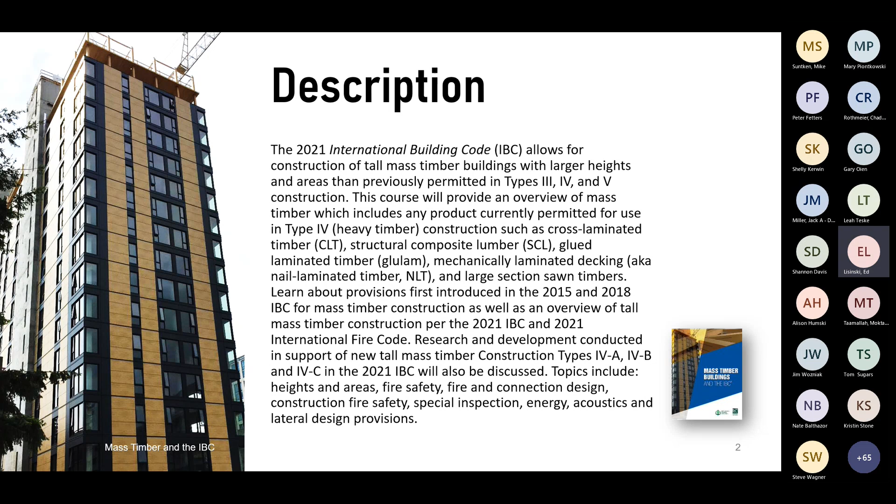I hear a lot from people saying we're not Milwaukee, we're not Madison, we're not going to get 18-story skyscrapers made out of wood, and I agree with that. We'll actually see some pictures with some of this mass timber. There are hotel developers, apartment developers, looking at using mass timber for even 3-story, 4-story buildings. There's even some little utility structures starting to use mass timber too. So yes, you might not get the big huge ones, but you're probably going to get mass timber at some point. There are so many benefits that you'll probably see quite a bit of that pop up in all communities.

The learning objectives are kind of the same thing as the summary, so I won't go through that. As for the outline, don't worry about the breaks that are on there - we're going to do breaks as we go.

All right, real quick though, what's everybody's job function here? How many plan reviewers do I have? A handful. Inspectors, most of them. Building officials and directors of departments, things like that, yeah. Fire officials, just one in the back there, all right. Any architects, engineers, contractors? Okay, a couple of those as well, awesome. How many are state employees in the room at least? All right, so about half, so, all right, good.

All right, so mass timber. Why do we need mass timber? I get asked that a lot - what's the big deal with this stuff? So here's a time-lapse video.

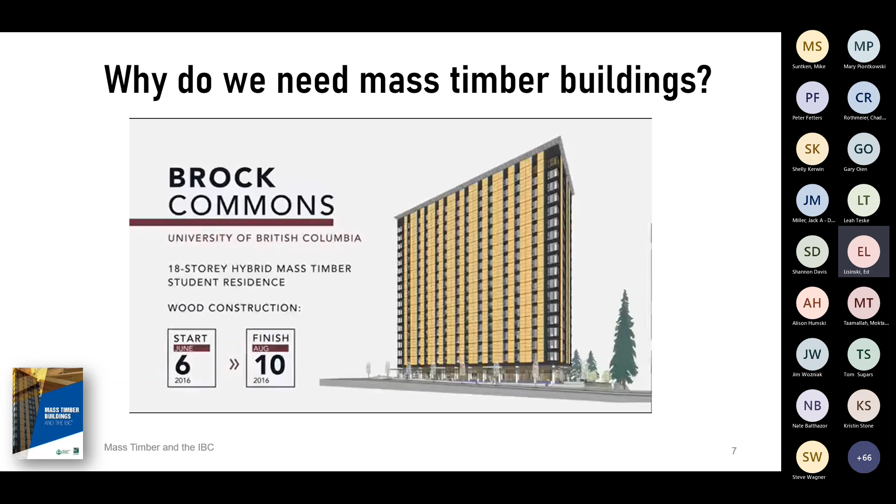This is a project up in Canada, in British Columbia, Brock Commons. I don't know if you caught the dates on there, but it's an 18-story project. In the lower right-hand corner, there were nine carpenters on this whole project - that's all they had putting this whole thing together. They're doing about 4.5 stories a week, getting an 18-story building done in 13 weeks.

Using mass timber here, they're using basically glulam for beams and columns, and they're using CLT - cross laminated timber - for the floors. We'll get into that quite a bit in this project. You can see the glulam columns going up in about 5 to 10 minutes - they're installing that column and moving on to the next one.

Is there anybody here from Milwaukee that was involved with the Ascent building at all? All right, just John. This is real similar to how the Ascent Tower was put together in Milwaukee as well. You see week 7, the facade's going up as they go, so they can kind of keep up with that and keep this building enclosed. That whole building was enclosed in about 15 weeks, I think.

You can see that they do have non-combustible stair towers - concrete stair towers in there. Anytime you get up over 12 stories, they have non-combustible stair towers. So there you go - 13.5 weeks for an 18-story building, all the way up and fully enclosed.

There's some of the environmental stuff - I know you guys can't read that, but you hear this all the time: you're cutting down all these trees to make these buildings, what's going to happen to the forests? In those hard to read stats, it took 6 minutes to regrow all the wood for that entire building in North America. So pretty much in the time it took to talk through this, we grew all that wood to make that 18-story building. So you're not going to be losing wood - we're always going to have that, we're always going to keep these sustainable forests going.

When we talk about codes, always make sure you're using the right reference standards. So for 2021 IBC, you're using the 2018 NDS. For the 2015 code, you're using the 2015 NDS. Hopefully everybody's at least somewhat familiar with the NDS and the NDS supplement. The NDS gives you all the formulas and equations on how to design wood buildings. The supplement gives you the characteristics of the wood, the wood strength properties, and section properties of the members. That's how those two documents work together. They're different, but they work together quite a bit.

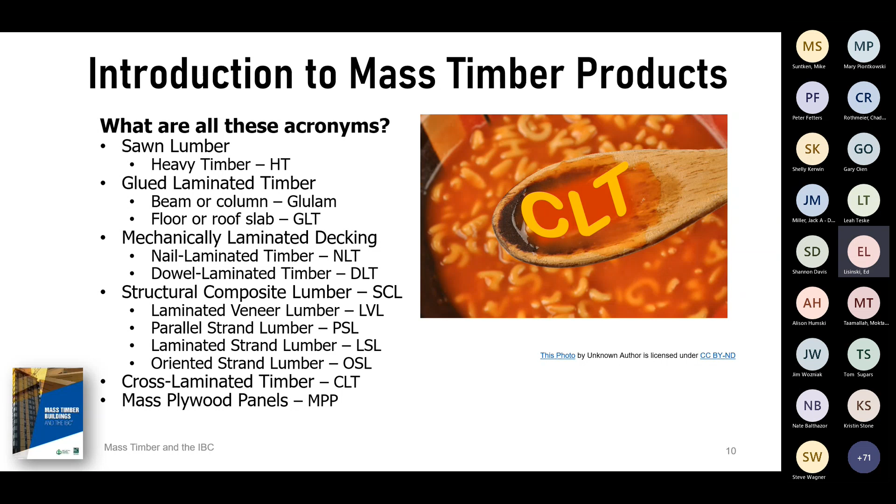So when we talk about mass timber, what are we actually talking about? This slide walks you through all the different things that are considered mass timber. If it's not on this list, it's not a mass timber element. We'll go through each of those in a little bit.

At least personally, when I started hearing about tall wood buildings, I was thinking about traditional stick frame buildings and how are you doing 18 stories with this stuff. Just so you know, mass timber has nothing to do with light frame, conventional light frame construction. This is completely different. Yes, they're both made out of wood, but that's where the similarities stop.

You can't use repetitive members. You can't use wood studs, wood floor joists, wood trusses, anything like that in a mass timber building. You're not going to see any of that stuff. That's why you're able to go so much bigger and taller with this stuff.

You think about mass timber, what do you think about making a campfire? You got a flame down there, but if you just throw a bunch of really big logs on there, the logs are going to burn while that flame's there, but as soon as that flame goes out, the fire on those big logs is going to go out pretty quick. It's going to char, it's going to protect the inner workings of that log, and you're still going to have a big log in the morning.

But you put a whole bunch of sticks underneath there, like wood studs or trusses, smaller members underneath there, now you're going to have a much bigger fire, and that fire is going to be on that log a lot longer, and yeah, it can burn out that log. So that's why in mass timber buildings like this, you're not going to see any of this traditional stick frame construction at all. The interior walls are going to be concrete masonry, steel studs and drywall, that type of stuff, but we'll get into that as we go.

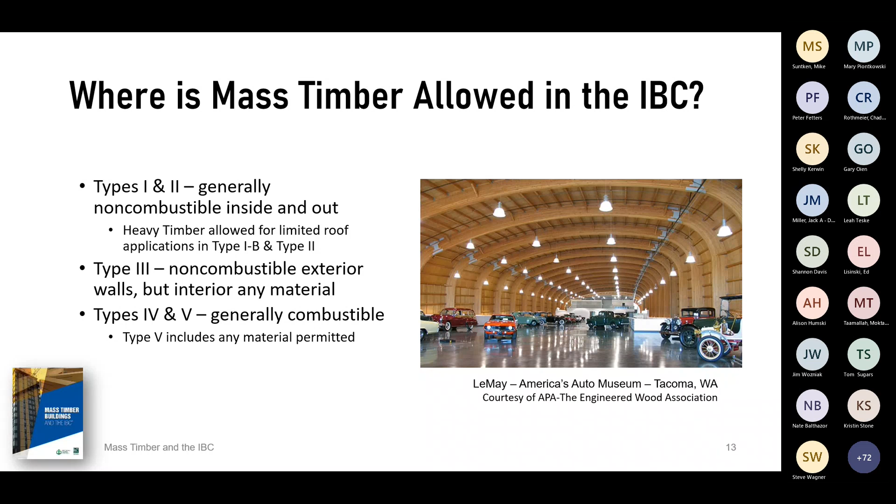Where's mass timber allowed? Type 1, type 2 construction, obviously it's non-combustible, but in type 1B and in type 2, you can use mass timber elements in roofs in certain circumstances. So heavy timber is allowed in some roof applications in 1B and type 2. In type 3, you've got your non-combustible exterior, but anything interior, you can use mass timber on that. And then types 4 and 5 construction, you can use mass timber throughout anywhere there.

Again, mass timber elements are the only combustible elements that you can use structurally in tall mass timber buildings. You still can use other combustible materials for non-structural purposes. So yeah, you can still have wood finished floors, wood doors, wood windows, chair rail, things like that, which you could also use in type 1, type 2 construction. But structural elements are always going to have mass timber elements.

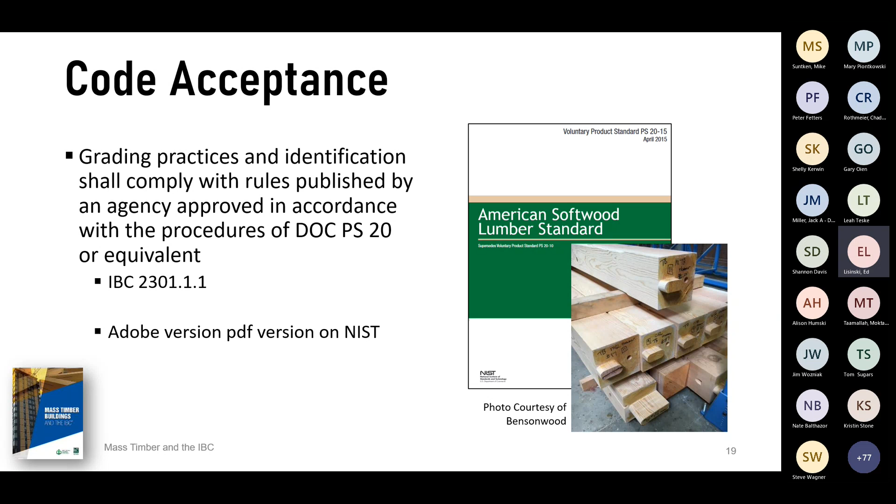The old traditional type 4 construction, you're going to use the PS20, that's the standard from American Softwood Lumber Standard. That's the same grading and same rules for that as you would any other piece of wood that's out there. That's covered in the NDS under Chapter 4, and in the NDS supplement, also in Chapter 4, that's where you get your reference values out of it.

I'll skip through some of that just because, again, you guys have seen this stuff before. So glue lams, again, products you guys have seen many, many times, but let me jump back a little bit here.

All right, so how are glue lams put together? Basically, you have a whole bunch of 2x or 2x type structures glued together, pressed together, and they make a nice big beam out of it.

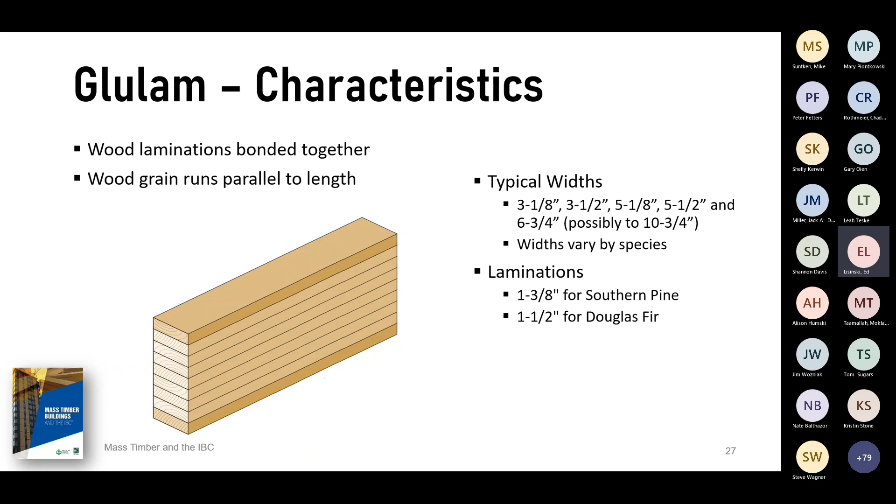Again, the wood laminations are bonded together, they're all running in the same direction. Glue lams, the adhesives that they use in there, they're all fire rated and they're exterior rated, so you can use these exposed in fire. The adhesives are good for that. We'll talk later on about how you have to kind of oversize them to work with that char, but we'll get into that later on.

You can also take glue lam, lay it on its side, use it as a floor panel, and that's considered a GLT, or called a GLT.

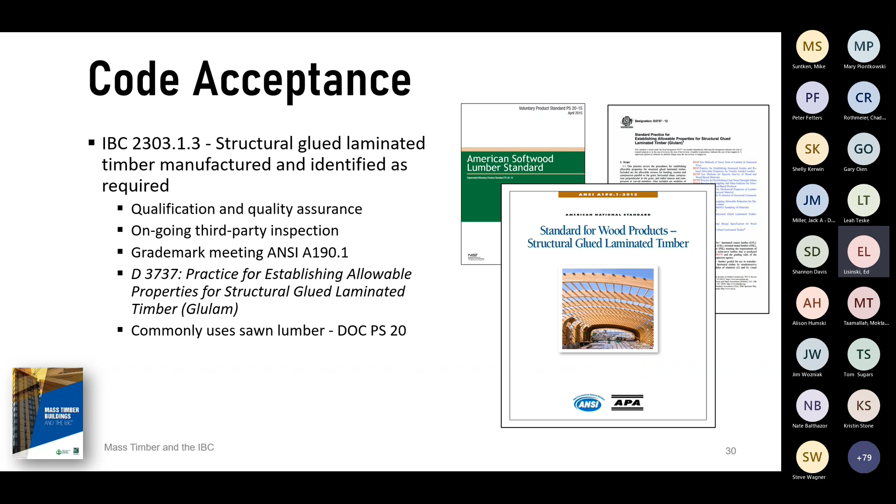There's some documents up there of the code acceptance, again. So you got the PS20 pops up again just because you're using typically sawn lumber in there. But then also the D3737, that's basically your standard for using glue lams. That's going to regulate the adhesive that's in there and things like that.

There's grade marks on them. It's going to give you a whole bunch of information. If you're out there in the field, make sure that you're checking the glue lams that they're sending out match the plans for what the structural engineer designed for.

Chapter 5 of the NDS covers glue lams. They're also in the NDS supplement.

They're going to be finger jointed typically, just because you're getting some really long lengths, right? So they're going to have to finger joint a lot of that lumber. So if you do see finger jointing in glue lams, that's perfectly normal. Actually, typically a lot of times you can, when you do finger joint lumber, you can actually make it a little bit stronger because you can take out some of the knots and bigger imperfections and kind of cut some of those pieces out, glue it back together, and you're good to go.

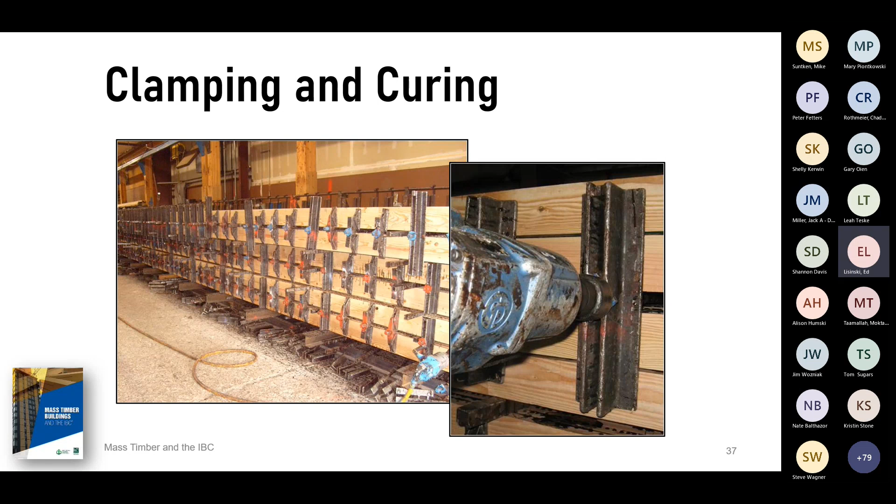So when they're making those bigger columns and beams, this is kind of what that looks like in the shop. So they stack this stuff all up together. They have a face bonding layer, clamp it down, pressurize it, sand it down, plane it down, get it out to the job site.

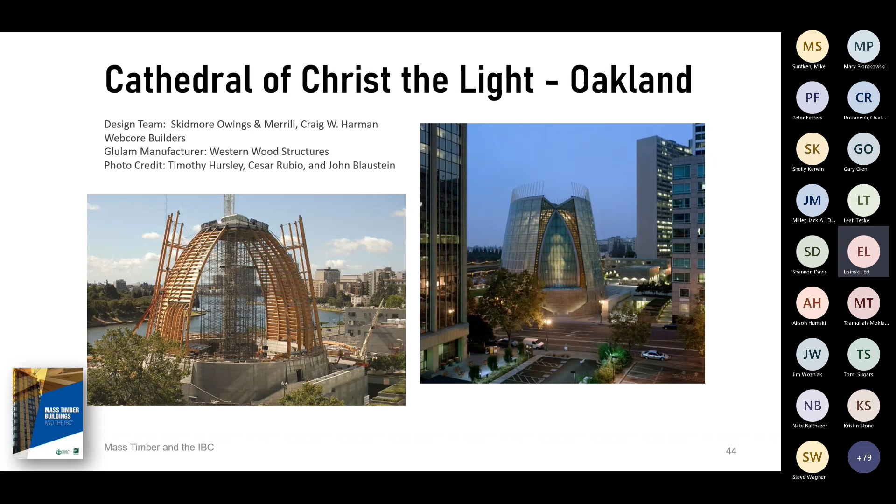Cathedral of Christ the Light in Oakland. Again, you guys have seen this stuff before, but you can do really cool things with it.

Other types of products: nail laminated timber, using that for floor slabs. You can do it in the factory or out in the field. It's basically laying down a whole bunch of 2-bys next to each other, 2x8s or so, and nailing them off one to the next.

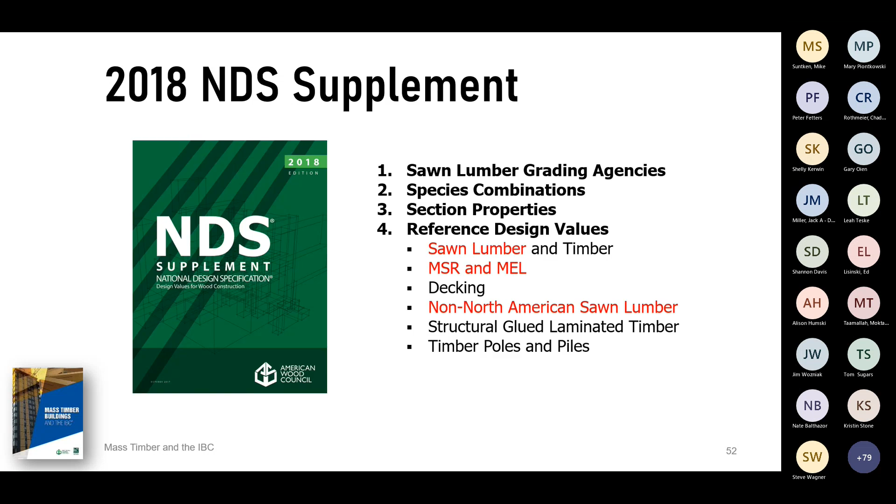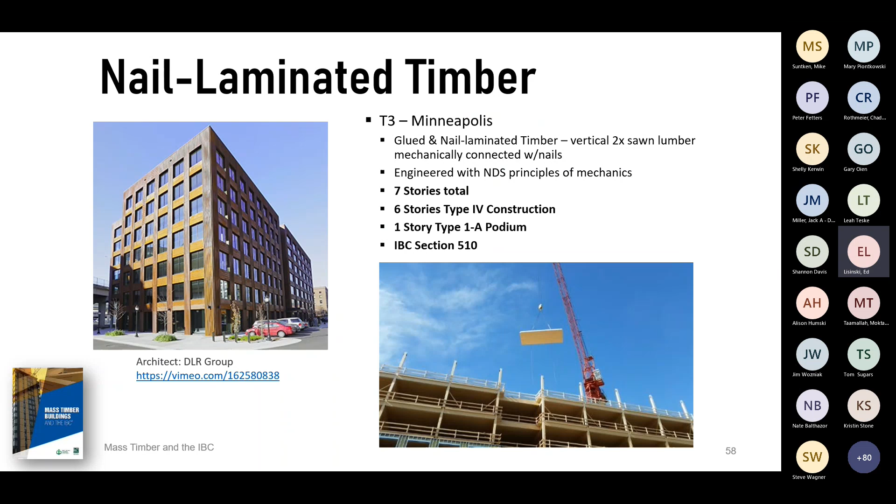There's a nail laminated timber handbook - not referenced in the code, but it's a guide produced by Think Wood that walks you through how to put this stuff together.

Kind of the cousin of nail laminated timber is dowel laminated timber. Very similar - you're putting a whole bunch of 2-bys next to each other, but this time you're boring a hole through it, pounding it and gluing in a dowel. Because of that, you're connecting these together more, gluing them, making a bit more of a bond. So these can actually have some lateral resistance properties - you don't have to add that plywood on top if you need these to be a diaphragm.

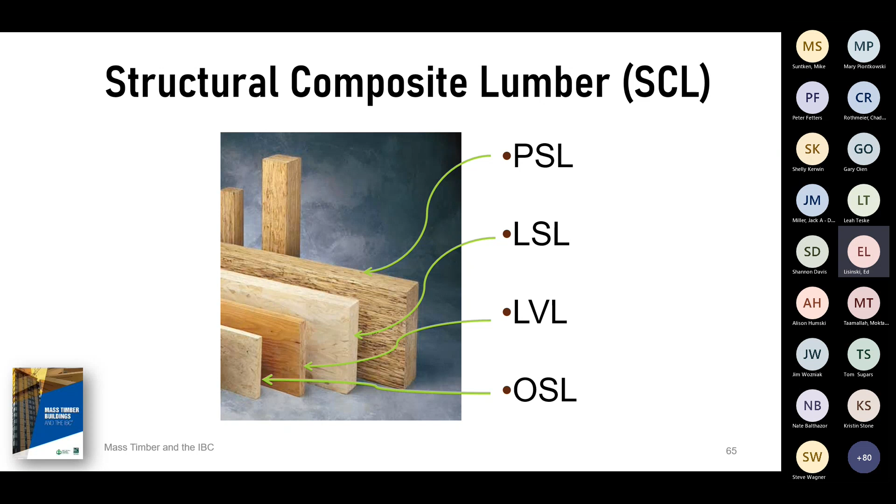There you're taking veneers, gluing those together, all the veneers going in the same direction again, very similar to putting together glue lam, but instead of 2x, you're using veneers on that instead.

Structural composite lumber is in chapter 8 of the NDS. Each of the manufacturers will usually produce their own strength properties on that. Otherwise, APA, the American Plywood Association, produces generic strength properties as well. So either check APA publications or the manufacturer specifications for that stuff.

But the one thing to remember, that table 602.4 in the 2015, or 2304.11 in the 2018 or 2021, you have to meet those minimum size requirements. So you're not going to see those small little LVLs that you'll get over a garage door—I think it's 3.5 inches minimum on beams for width. So again, make sure you're checking that the sizes are appropriate.

All right, and then the big one here, cross-laminated timber. This is kind of what allowed us to go bigger and taller with our wood. It's the substitute for concrete and steel on floors.

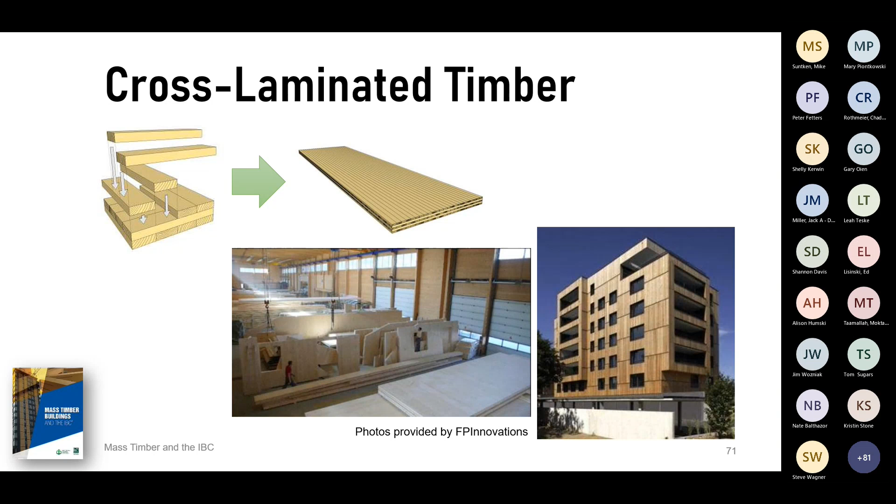The PRG 320 is the standard for those. There was a big change in 2018. We'll talk about some of the testing that was done using these in a little bit, but the adhesives used in the older stuff, that's what was tested, and that's what was used when they wrote the 2021 code.

The PRG 320-18, the new version that came out in 2018, greatly increased the capacity of the adhesives that are used. So now they're doing a whole bunch more testing. And that's why in the 2024 code and beyond, you can almost see these buildings going bigger and being exposed to fire a little bit more.

So again, the adhesives used are real similar to glue lams—they're going to be fire resistant and exterior grade. After all the testing was done to get into the 2021 code, they really improved those adhesives again, and that's why in the future you're going to start to see even more expanded use of this stuff in the codes.

Cross-laminated timber does have its own section in the NDS. And here's a brief little history of CLT.

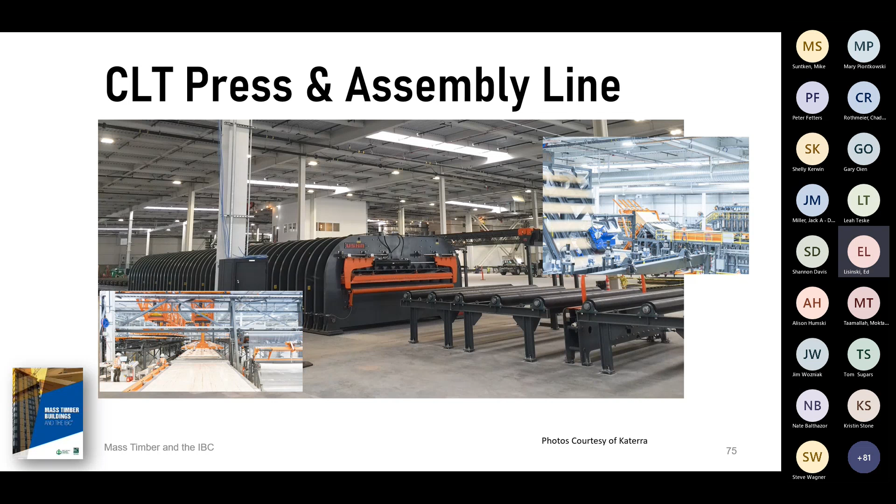All right, so here is the plant, here's how this stuff is getting made. It's real similar to glulam - basically putting those all in there, gluing them together, putting them through a press. Here's a few more pictures of it, you can see another glue layer going on the left there, and then you come out with these big panels at the end.

One of the points I was going to make too, about not a lot of people using it here - the Ascent Tower, and Atlanta's getting a 22-story mass timber building pretty soon. I know at least those two for sure, and I think the one in St. Louis is going to be starting as well. All of those are actually getting manufactured out in Austria and then shipped over, all those panels.

So even with the logistics of shipping and transportation, these buildings are still ending up cheaper - they're ending up with labor savings and faster construction time frames. You're still seeing those returns on investment for those costs. But as more plants start building this stuff in the US, that's going to make it even easier.

These panels right now, really the only controlling factor on the size is the width, which is based off the press—you can't go any wider than the press you have. But the length you can really make as long as you want. It's a matter of transporting them to the job site then. How are you getting them?

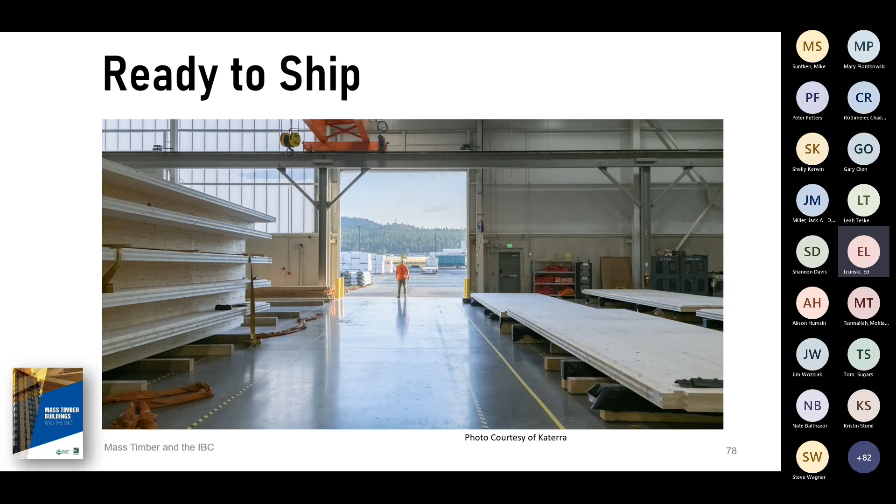So you're making these big, long panels. Most of the time they're getting used for floors, but you can use them for walls. This presentation is gonna go into a lot of scenarios if you're using them for walls. People do use them for walls, but not as much. You're mostly seeing them as floors, but we'll go through a whole bunch of wall scenarios as well.

I think he had 8 batteries lined up on the wall. So that one runs out, pops that battery out, puts it in, grabs another battery and keeps going.

And that's a whole nother thing on lithium ion batteries, but I won't get into that stuff. If you haven't started looking into that, definitely as building officials, fire officials especially, start looking into lithium ion battery storage. But I won't get into that soapbox because that would be quite a while.

But panel connectors—every time you see Simpson, they've got new stuff coming out with this because, like Randy said earlier, this is new stuff. As people start to use this and work with it in the field, they're coming up with new connectors, new fasteners—how can we make this process even easier, even better? So every time, they're coming up with new panel connectors and things like that. These little clips that they have...

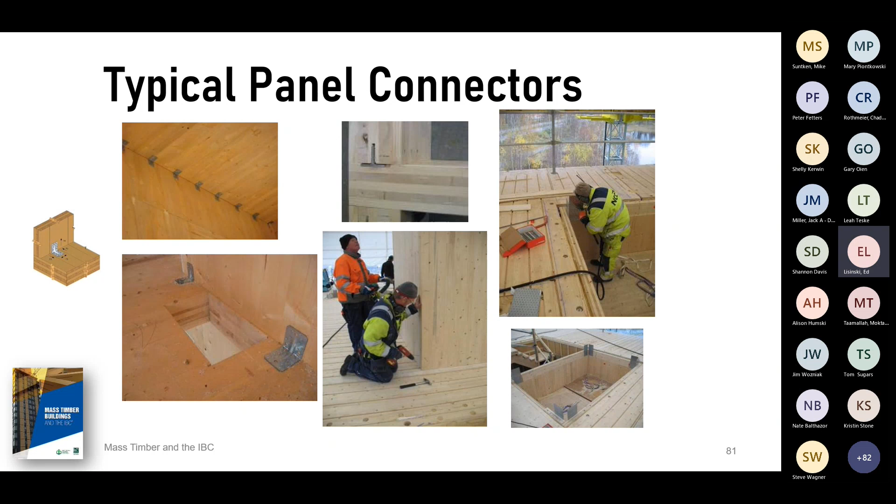But again, they were building up everything on the inside as they went. Because that was an Army hotel, they actually had to go through U.S. Department of Defense blast loading requirements to withstand bombs and things like that. It passed all that stuff.

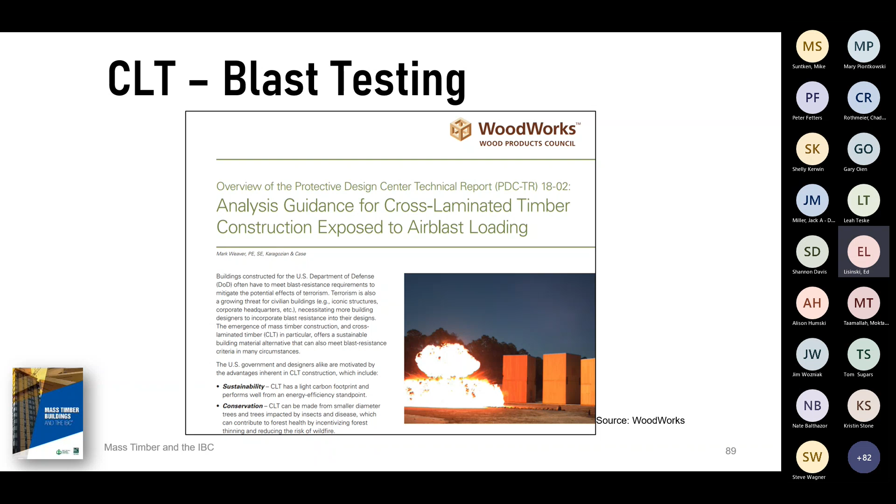A lot of universities are using this. Clemson, Michigan State have huge programs using this stuff. Pretty much every California school, every Oregon school - just because they can bring in their construction, engineering, and environmental schools and really study the environmental benefits of CLT.

They're sequestering so much carbon inside these buildings - I forget how much, this one might have it on there. On some of these it talks about how many cars, you're taking hundreds of cars off the road each year by building one of these buildings, just with all the carbon you're sequestering inside the wood.

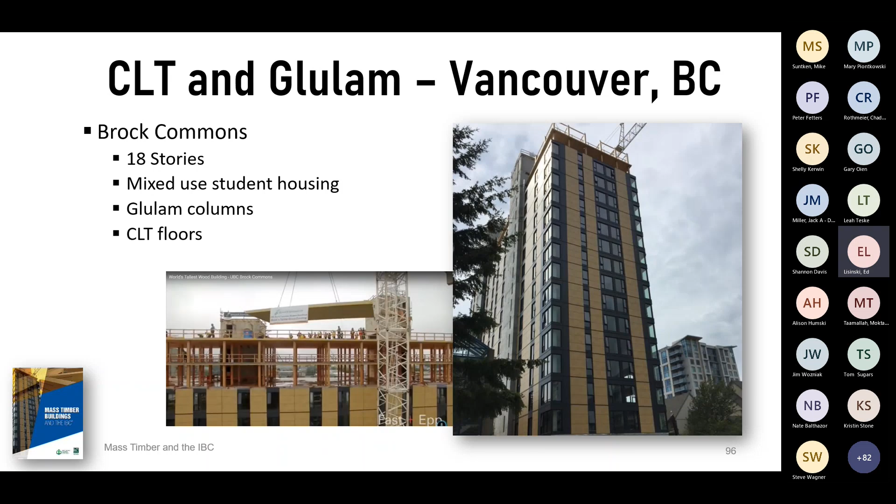Again, a couple other projects up in Canada and things like that. Mass timber throughout the world is really starting to take off quite a bit.

They'll actually make smaller panels of plywood about an inch and a half thick, and then move those down into other plywood panels - so they basically make plywood and build it up with additional plywood. Mass plywood panels aren't covered in the AWC at this time, so that's something you'll look for in your ES reports. But as people start to use this stuff, it's probably going to start getting into the code pretty soon.

Questions on any of that stuff? Are there standard methods of connections for panels, or is it all tested or engineered? It's mostly all engineered, and we'll talk about CLT a lot more as we go. Basically, talking to Simpson or any of those manufacturers if you want pre-done connectors like that. But again, a lot of those are more for seismic applications.

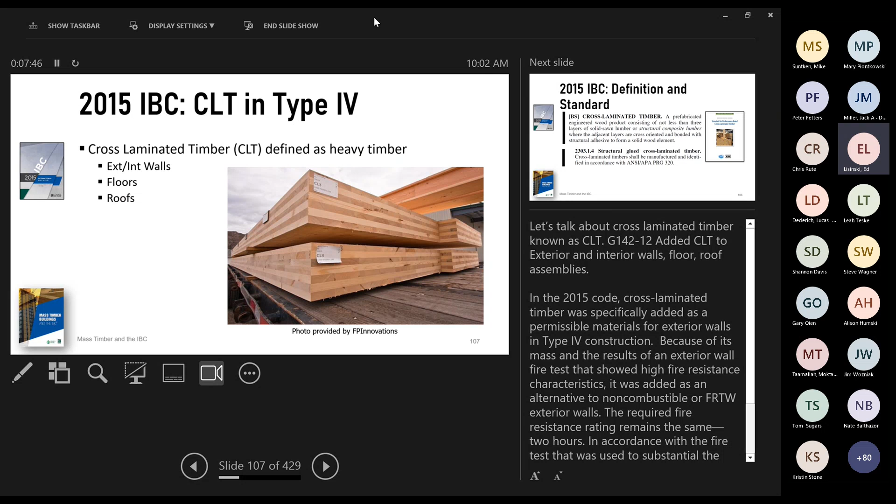Cross-laminated timber was actually introduced in the 2015 code. It was defined and basically spelled out where you can use it in type 4, your traditional type 4 buildings. So cross-laminated timber, the definition was added in there - again, this is the 2015 code.

In order to get that in there, there were a whole bunch of E119 tests that were done. They determined that with one layer of 5/8 type X drywall on there, you can actually get a 3-hour fire rating out of a CLT panel using the E119 test. You can see it down to 3 hours and 6 minutes - I think they ran that through.

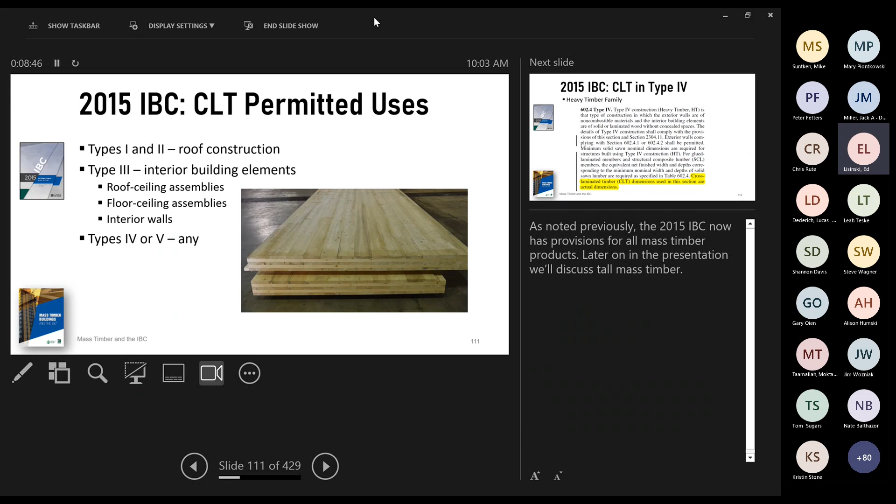And then again, that's where you're starting to develop all those same locations that you can use this stuff in the codes that we talked about earlier. So type 1, type 2 construction, using that on the roof in 1B, and then 2A, 2B, you can use mass timber up there. Type 3, anywhere on the interior, pretty much except for your exterior walls. And then type 4 and 5, you can use that stuff throughout there.

Again, CLT was brought in and basically just inserted into type 4 construction throughout those code sections in 602.4. One thing to note, still in the code - cross-laminated timber dimensions are actual dimensions in the code. So everywhere else you're talking about wood, you're typically talking about nominal widths, nominal sizes, but CLT is actual dimensions.

So cross-laminated timber and exterior walls - again, you can use that stuff in here. I'm gonna kind of skip through a lot of this stuff, I'll let you know what's in there, but I won't go through the actual code language since it's 2015, we're moving on from that, and you guys can all read the code anyway. So again, cross-laminated timber and exterior walls, some provisions were added in there for that.

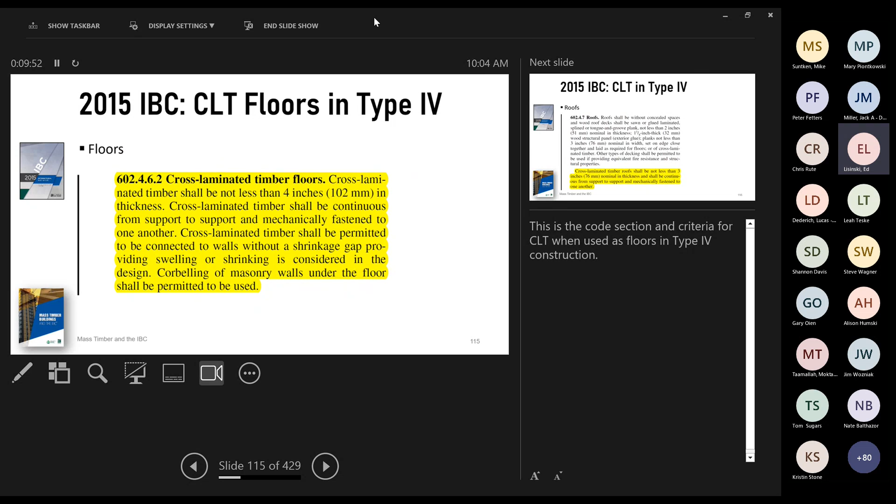Wood structural panels in floors, cross-laminated timber floors, was a section introduced in chapter 602.4, which is type 4 construction. Roofs, cross-laminated timbers were added, minimum 3 inches thick. Partitions and walls, laminated construction 4 inches thick or 1 hour fire resistance rated. Exterior walls, again all in chapter 602.4. And that's pretty much it.

So in the 2015 code, CLT was introduced, and it basically said that in type 4 construction you can use it in floors, in ceilings or roofs, in walls, interior and exterior, and that we're using actual dimensions. So that's the first introduction to it.

In the 2018 code, the IBC really started putting a lot of requirements into chapter 602.4. Type 4 construction was getting huge compared to the other construction chapters, so they pulled everything out of 602.4, all the construction requirements, and moved it into chapter 23, the wood chapter. So all that stuff we just talked about, which was in 602.4 in 2015, got shifted over to 2304.11. Basically the same requirements throughout, just moved to a different section.

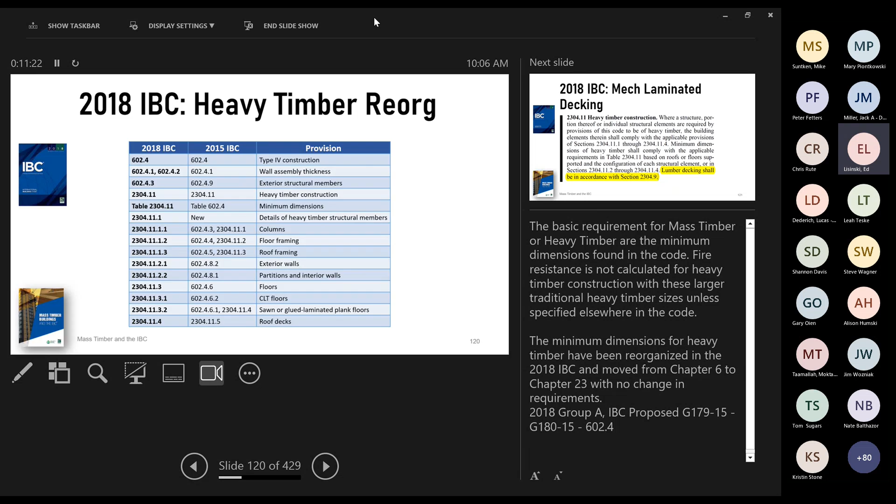Also, some lumber decking, mechanically laminated decking, was added in there. We talked about mechanically laminated floors before, and nailing those off.

Section 2304.9 was added, and that's those nailing patterns I talked about earlier. I'm not going to go through it all since you guys can all read code, but just so you know it's in there, that's where you find it. So if you run into nail laminated decking on a job, this is where all those nailing patterns and requirements came from. It also added a new fastening schedule for that as well.

Cross laminated timbers in exterior walls was changed to 6 inches thick if you're using CLT on exterior walls.

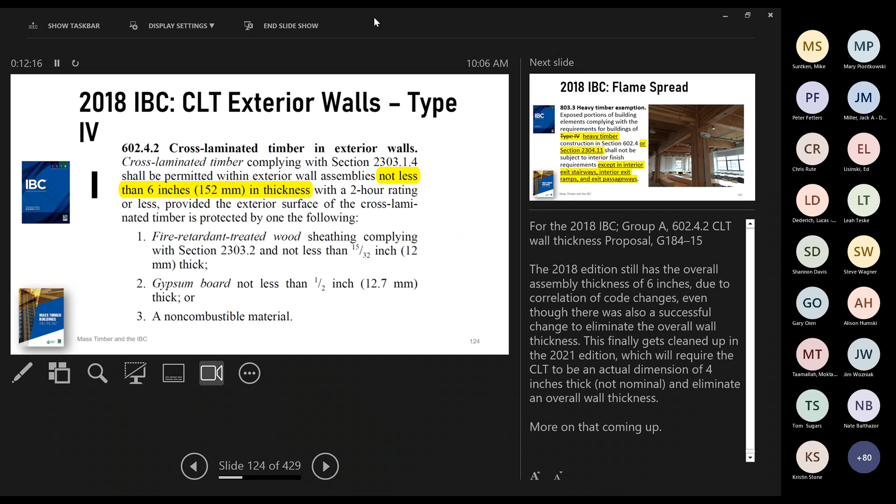Also in 2018, the code committees really started to look at whether we're talking about type 4 construction or heavy timber elements. They went through editing a lot of sections, asking: before it might have said type 4 construction, but are we really talking about type 4 construction or about big pieces of wood? If you use a big piece of wood in a type 5 construction scenario, would this still apply? There's a lot of editing throughout, and I don't have them all listed here, but throughout the code in 2018 they really looked at whether they meant type 4 construction or just big pieces of wood. You'll see that throughout the code.

Here's a bit more on where they were editing that stuff, and then talking about structural composite lumber. A lot of this I'm going to skip through, since we often do these classes with people who haven't gone through construction types and things like that, but I'm sure you guys are pretty familiar with this stuff, so I'm just going to jump through a lot of it.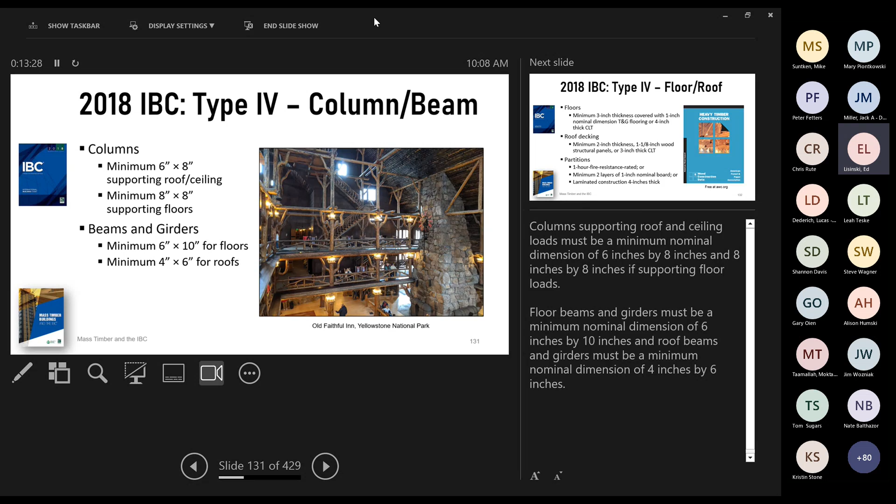But for type 4 construction, if you're using CLT for floors, minimum 3 inches thick, your wood must be covered with 1-inch tongue and groove flooring or 4-inch thick CLT. Roof deck: minimum 2 inches thick with 1 1/8 inch wood structural panels, or 3-inch thick CLT. Partitions: 1 hour fire resistance rated, minimum 2 layers of 1-inch nominal board, or CLT that's 4 inches thick. So those are your requirements for the panels being used in type 4 construction.

Type 3, I'm not going to get into a lot of this stuff. Allowable heights and areas, you guys know this, so I'm going to jump through a lot of that. We get a lot of people who don't know how to calculate area, so we keep this stuff in here in case we need to go through it.

One thing I always want to note for firewalls: they're still any approved non-combustible element except for type 5 construction. That's still in the code in 2021, still in 2024. I don't know of anybody looking to change that in 2027, but even with tall type 4 construction, heavy timber buildings, if you're in a type 4 situation, it's still a non-combustible wall if you need a firewall. That firewall separates one building into two, basically.

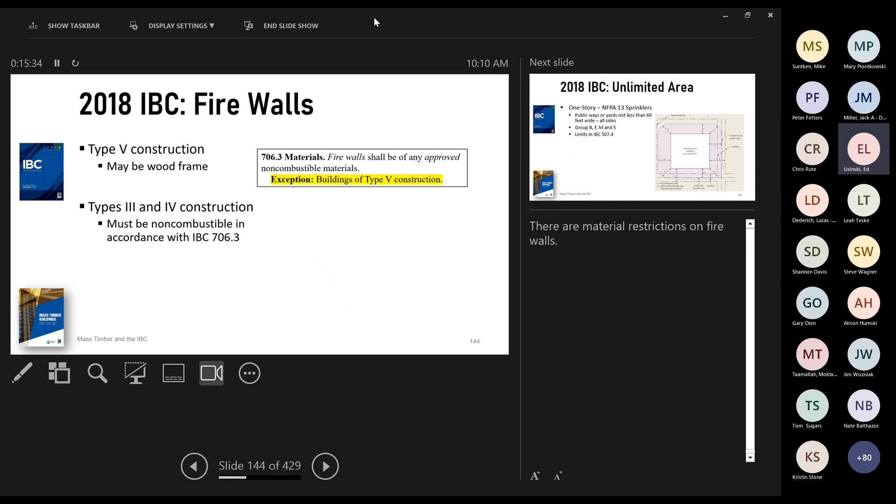Not talking about fire barriers, fire partitions, none of that - you can use combustible construction there. But if you're in a type 4 building, even under the 2021 code, type 4A buildings, it's all CLT everywhere. If you need a firewall, it's got to be non-combustible. You can use CLT in a type 5 building because combustible firewalls are allowed there. So I always want to touch on that.

Again, how to calculate areas and things like that, I'm going to skip through. There were a few things with storage garages in the 2018 code where type 4 construction was permitted.

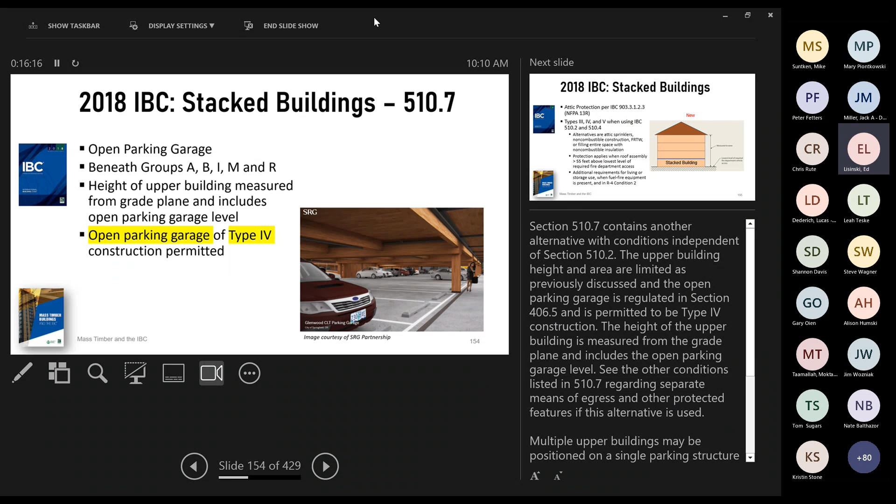Single story S2 parking garage, underneath the group R - your pedestal buildings, you can use type 4 construction down there now. Same thing underneath groups A, B, I, M, and R - pedestal type construction, open parking garages, you can use type 4 construction there.

And that's kind of it. So 2018 was a little bit more just reorganizing, moving everything into the wood chapter, and going through making sure - are we talking about type 4 construction, or big wood type elements? Starting to make sure the codes are coordinated with that. Any questions on 2015, 2018? I kind of jumped through that pretty quick, but alright.

Now we'll get into the 2021 code. I brought this up earlier, but mass timber has nothing to do with conventional light framing. They're both made out of wood - that's about where the similarities stop.

In a similar way, type 4A, 4B, 4C - that's your 3 new construction types in the 2021 code. We'll talk about those quite a bit. Those are totally separate from your traditional type 4 construction, which got renamed as type 4 HT. The heights and areas for your traditional type 4 are still exactly the same - they just got renamed, but there are a little bit of changes with some concealed spaces in 4 HT.

We'll talk about that later, but otherwise 4A, 4B, 4C and your traditional type 4 are pretty much different as well. Same elements, but different in how the chapters are built and how the buildings are put together.

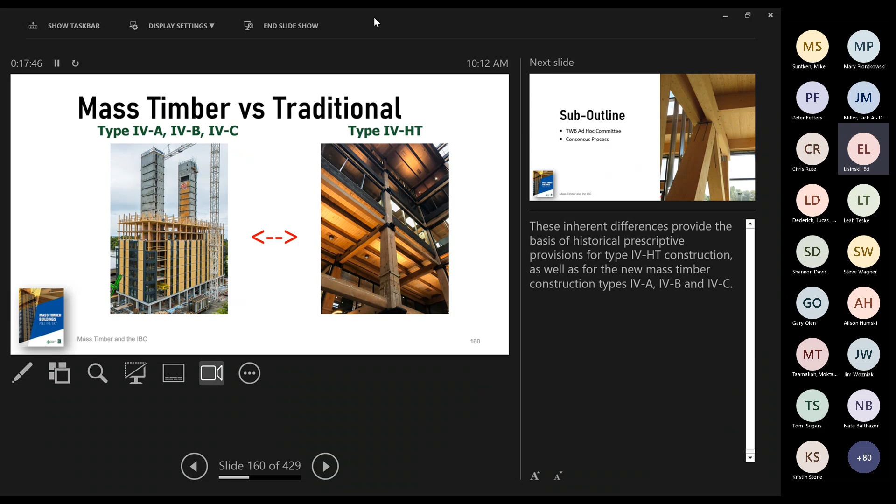So in December 2015, ICC got together and said, hey, people are using CLT, building really tall big wood buildings over in Europe - should we start bringing that over here? So they wanted to put an ad hoc committee together to explore the science and engineering behind these tall buildings, look at the feasibility, and look at what it would actually look like if we put them in the IBC.

So they put together a big ad hoc committee and brought in pretty much everybody - building officials, fire officials, inspectors, plan reviewers, architects, engineers, developers, contractors, some hotel developers and big name hotel chains had representatives in there, fire protection experts, other material industries, and other construction related professionals. They got pretty much everybody into the room.

This is an actual picture of the ad hoc committee at work. I love this picture because if you've seen any of the code hearings, you've got the steel industry, the concrete industry, and the masonry industry all sitting front row at the ad hoc wood committee meetings. So they were all very well involved, and that's why I think this stuff passed - because we got them involved early on. And I say we, but I wasn't part of it - the ad hoc committee in general.

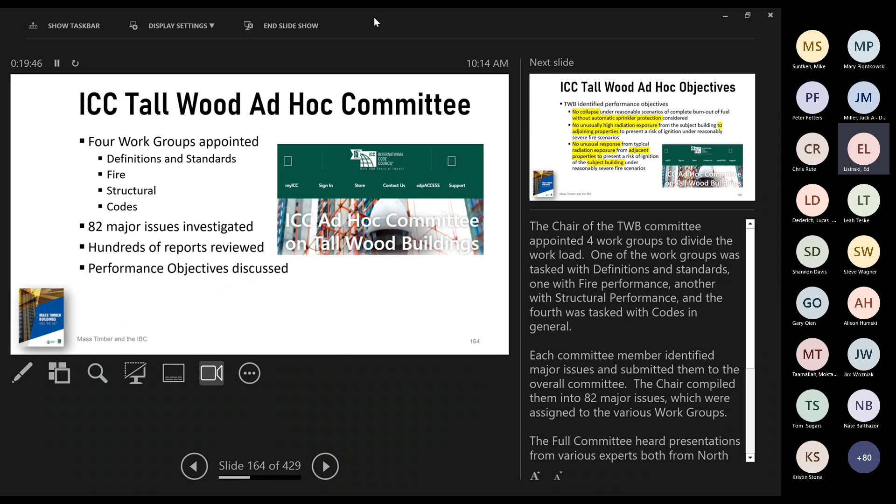How are we going to write this stuff in? So 82 major issues were investigated, hundreds of reports, and they came up with 6 performance objectives and one kind of unwritten one that I'll talk about as well. So they had 6 main performance objectives that they came up with.

The first one: no collapse under reasonable scenarios of complete fuel burnout without automatic sprinkler protection considered. So what that means: you've got a tall mass timber building, and there's a fire, a reasonable fire scenario inside one of those units. Sprinklers don't go off for whatever reason. We want to make sure that building doesn't collapse on itself. Seems pretty reasonable.

The second one: no unusually high radiation exposure from the subject building to adjoining properties to present a risk of ignition under reasonably severe fire scenarios. So now that mass timber building we have, a reasonably severe fire starts in there, we want to make sure it's not going to jump to a neighboring building and start that one on fire.

The opposite for the third objective: no unusual response from typical radiation exposure from adjacent properties to present a risk of ignition to the subject building, again under reasonably severe fire scenarios. Now you've got your mass timber building, the building next door has a reasonably severe fire in it. We want to make sure that fire is not going to jump over and start the mass timber building on fire.

Fourth objective: no unusual fire department access issues. So the fire department should be able to come in and do their job just like any other building that's out there.

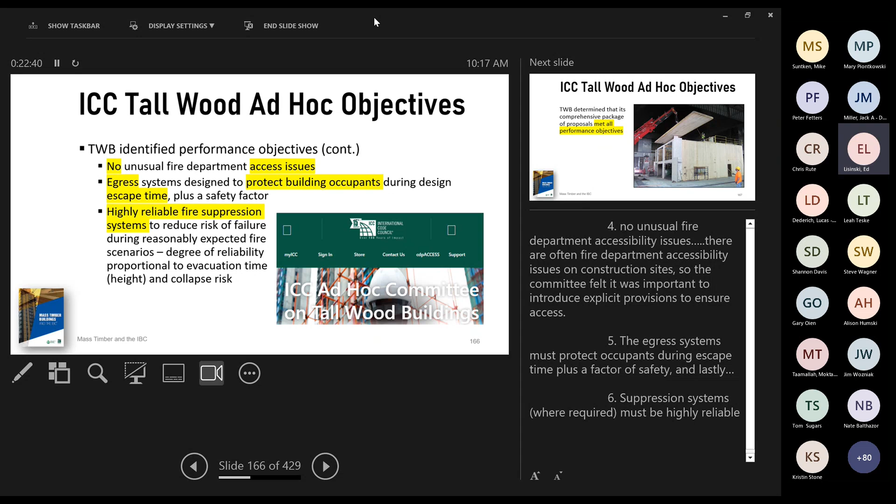That wasn't one of the written objectives, but it was definitely something that was talked about quite a bit in that ad hoc committee. Everything that went into the code had test reports—they had tested it and proved that it works.

At the end, the tall wood building ad hoc committee determined their package of proposals met all the performance objectives, so all 6 of those scenarios that they were comfortable with. This was their test facility. We'll talk about that in just a second here.

So the fire work group—the firefighters, fire protection engineers, and everybody in that group—they wanted to prove everything that went in there, basically. They had a lot of test data from other testing agencies, but they wanted that final test data, that final test report for all the different scenarios they were going into the code with. So they came up with a 2-story condo situation.

It was 30 by 30, had a corridor around the outside, a stair tower on one end. They loaded it up with modern furnishings, and again, they did this as realistically as possible. So they put in the sprinkler system, they cored out holes for plumbing, hooked up plumbing, hooked up electric, hooked up everything. They put in furnishings, and they had a concealed space in there so they could study the effects on that. They wanted to make this as realistic as they possibly could.

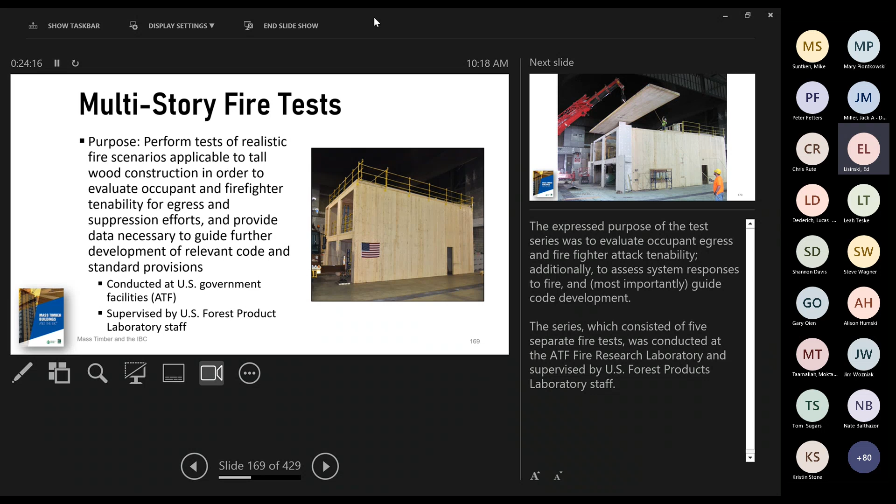So the purpose was to perform tests of realistic fire scenarios. This was done at U.S. government facilities, supervised by the Forest Products Lab staff right here in Madison. So they were pretty heavily involved in this stuff as well.

Here's that 2-story condo test situation. You can see the scale of those CLT panels, that roof panel going into place, as compared to the worker standing up there.

They ran 5 different tests. Tests 1 through 3 ran with no sprinkler system activation—the sprinklers were installed but never activated. Test 4 was run with sprinkler activation. Test 5 was a scenario where they didn't turn on the sprinkler system; they waited 20 minutes, then had a fire truck pull up, hook up to the fire department connection outside, and back-charge the system that way.

We'll talk about what each of these tests are in a little bit, but this is the duration of the tests. They stopped each test once the fire ran out basically—they started a fire in each scenario, burned it out, and once the fire stopped, that's when they concluded the test. You can see how long each of these took, but we'll talk about these as we go.

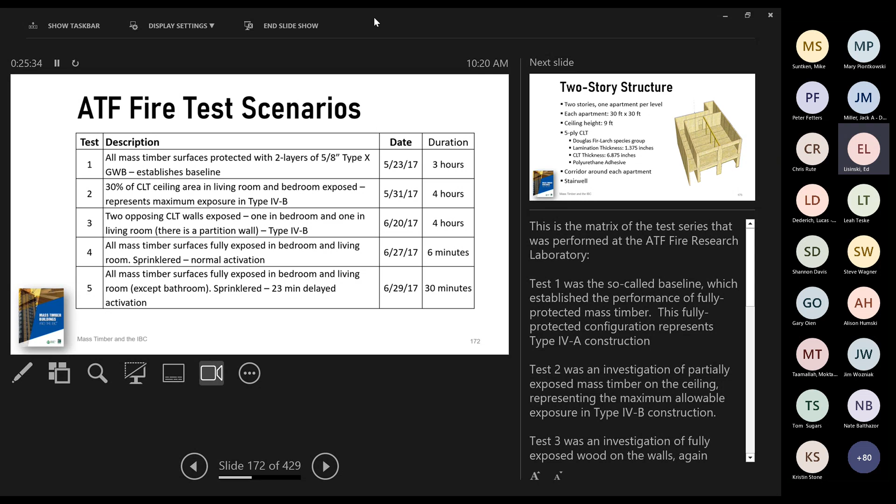So here's a little more on the 2-story structure: 30 by 30, 9-foot ceiling height. They did 5-ply CLT throughout, with CLT floors and a ceiling or roof, and some of the walls were CLT as well. Right down the middle, that yellow part is a glulam beam and glulam posts. They have the corridor around there and the stairwell in the back.

I mentioned this earlier, but the PRG 320 standard that governs the CLT panels—this is using that older standard, so some of the older adhesives and older methods.

They did steel stud partitions inside with 1/2 inch gypsum. You can see the layout here—a combination kitchen living room on the left, a bedroom on the right with a little hallway, a toilet room in the back, a washer dryer in the middle, and a closet. They built it up like it was a real unit.

They had a 20-minute rated door out to the corridor and a 90-minute door out to the stairwell.

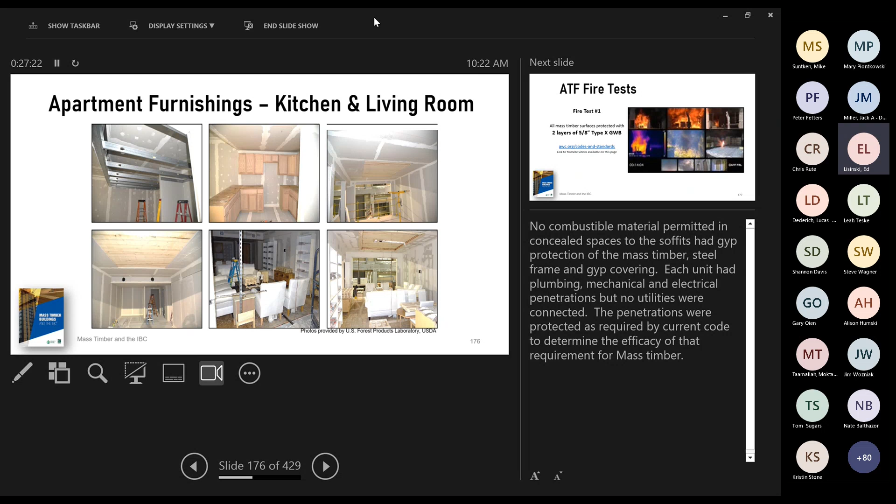And then they furnished it again—you can see all the furniture they put in there. In the upper left corner, that's a concealed space they put over the kitchen cabinets, a little soffit area so they could explore what happened there. In the top center picture, the kitchen cabinets—all the fires were started in that lower cabinet facing you, right in the corner. They built it up with actual furniture so they could take a look at all this stuff.

Fire test 1, that's their base test—establishing a baseline. All the mass timber in that building was covered up with 2 layers of 5/8 inch type X gypsum.

Let's watch this fire test. If you noticed in that earlier graphic where I was explaining the tests, this test ran for about 3 hours, so that should take us till after lunch sometime when we watch this.

See if you're paying attention. You can see in the lower left that he started the fire in that kitchen lower cabinet area. Again, this is their base test—everything's covered up, 2 layers of 5/8 type X on all CLT throughout, but no sprinkler activation. So this is just starting the fire and seeing what happens when you start burning this stuff.

You get flashover in the living room there, right around 13.5, 14 minutes on most of these tests. With no sprinklers activating, it does burn up pretty good, but you're mostly just burning the contents of the room. So we got flashover in the kitchen living room area.

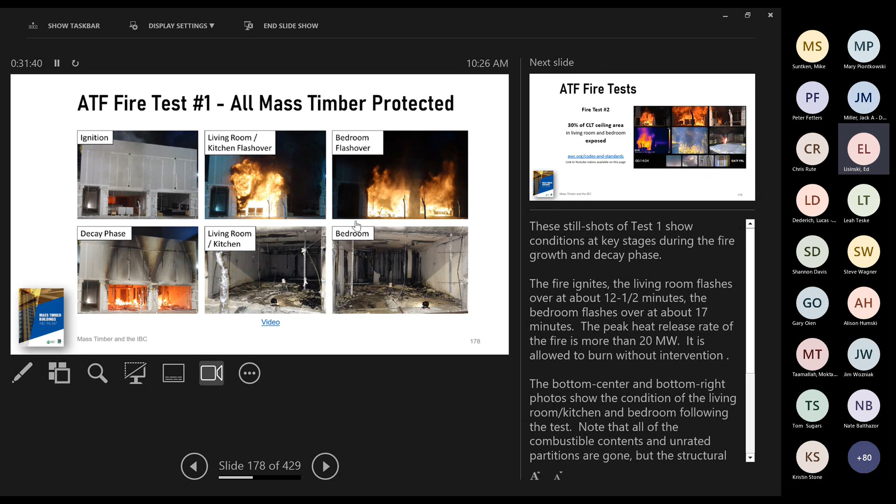It's awc.org, if I didn't mention that earlier. We actually have a landing page on there for mass timber buildings that you can go to and see all that stuff.

Fire test 2 was similar to fire test 1. They covered up everything with 2 layers of 5/8 type X, except they left 30% of the area in the living room and the bedroom exposed. So they had a chunk of the ceiling exposed in the living room, a chunk of the ceiling exposed in the bedroom. Ran the test the same way. This one they ran for 4 hours, but it pretty much looked exactly the same at the end.

But you can see the areas that were left exposed of that wood, they're in the lower center and the lower right. Here's an even better picture, where they took off all that gypsum so they could explore what happened to the CLT. You can see over here, this is that ceiling area they left exposed in the living room, and here's that ceiling area left exposed in the bedroom. You can see how that charred, right?

So, and I talked earlier about the campfire scenario, right? You put that fire, and you got a little fire. You put a big giant log on the campfire, and as soon as that fire burns out, yeah, that log is going to char and everything, but it's not going to keep burning. So that's pretty much what happens with this stuff as well. That CLT is going to char, and we can predict how much char is going to be on there, how much of that's going to burn in a given time, and then that's going to protect the rest of what's in there. So yes, it's sort of a sacrificial char layer that we have on the CLT.

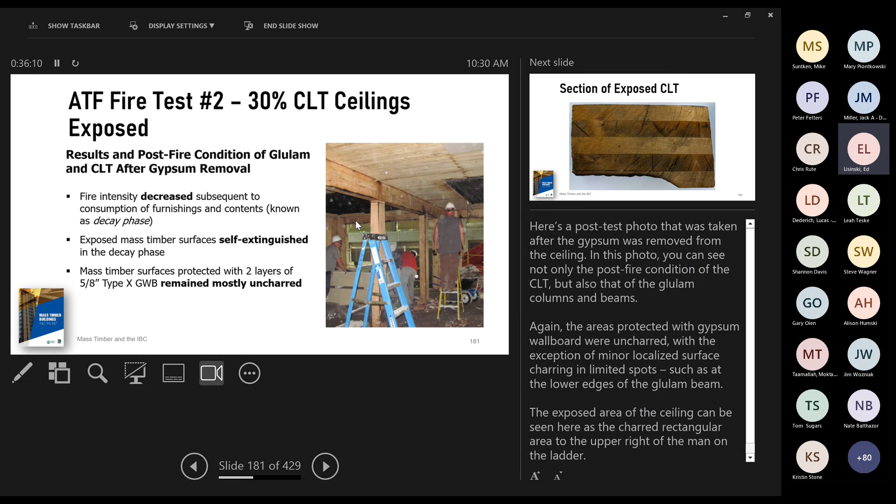We'll run into that later on where we talk about how much char through testing that we have. You can see from here over is where the 2 layers of 5/8 were on there. I do want to point out, as long as we're on here, you can see there's a little bit of char on that beam, where the fire would come up and go around it, but for the most part all that CLT was pretty well protected in there.

Now on our website, we do have some engineers and scientists, people way smarter than me, who have gone through and come up with a repair method that we have on our website as well, where you can cut out the affected laminations. Basically they take a saw, cut into the next lamination that's on here, so they would just cut out this bottom lamination all the way across. They came up with a glue and screw method to put a new lamination onto there, then pull out those screws, because they don't want that metal in there since it would affect the fire properties of it. But they've been able to do that, and they actually went through and did fire testing on it again.

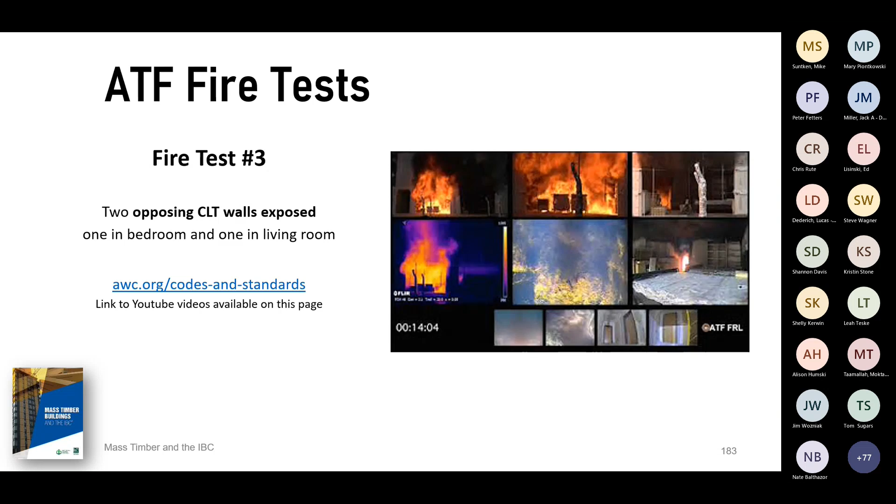Fire test 3, same thing or similar. So now what they did was they left 2 CLT walls exposed, the whole wall exposed in there. Again, 2 layers of 5/8 type X covered up everything else, but one wall in the bedroom and one wall in the living room they left exposed during the fire. As Randy would probably point out, in the code it's 40% of the area for walls, 20% for the ceiling. Here they just left that whole wall exposed, kind of cranking it down a little bit just to be able to get it through. So fire test 3, pretty much the same thing - you had the walls charred at the end.

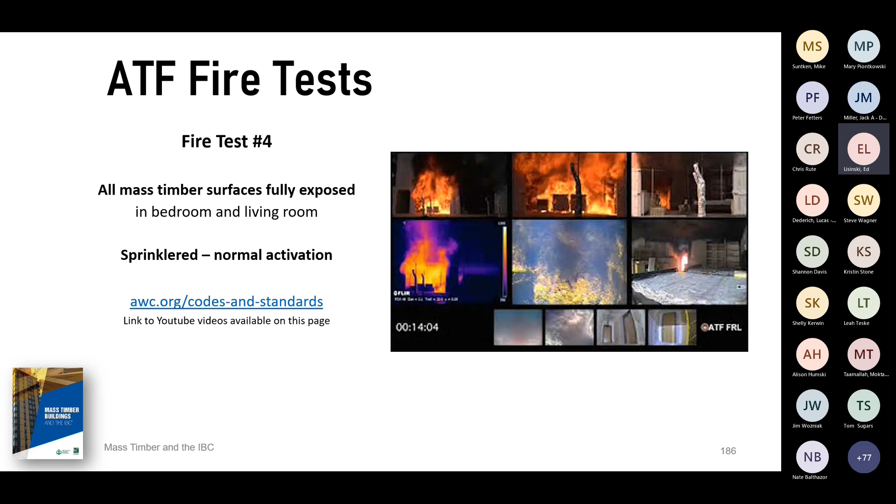Fire test 4. They actually left all the CLT exposed in fire test 4, so they didn't put up any gypsum covering the CLT at all, but they let the sprinklers run. You can see in the bottom center picture that's all the damage that was done there - just the cabinet itself got burned up. Then the sprinklers activated and put that fire out right away. But you can see everywhere else the CLT was left exposed.

And then fire test 5, again they waited 20 minutes, set the fire, waited 20 minutes. They actually had a fire truck come over and hook up to the fire department connection that they had - back charge system, that took about 3 minutes. So actually at 23 minutes is when the sprinklers activated, and in about 7 minutes that fire was put out as well.

Question - for the water, the sprinkler and the other one you're talking about, did that affect the materials at all from the water? The water, I've been told no, but I haven't personally seen any reports or data on that. I've asked the question before and they said no, it didn't affect it. But that's not really the best answer, so.

So I've been told no, but I'm not confident in saying that for sure, but I'm sure it would have been brought up by now. They probably got some sort of preservative or something on that too, in the factory, so it's gonna retard that plus. But not just that - there's sealant required between the CLT panels and stuff. Usually on the floor you're gonna have some gypcrete. I'd be more worried about having that come down to the lower units and start going throughout the building, hitting some of the penetrations and stuff, but yeah, I've been told it doesn't have an effect, so.

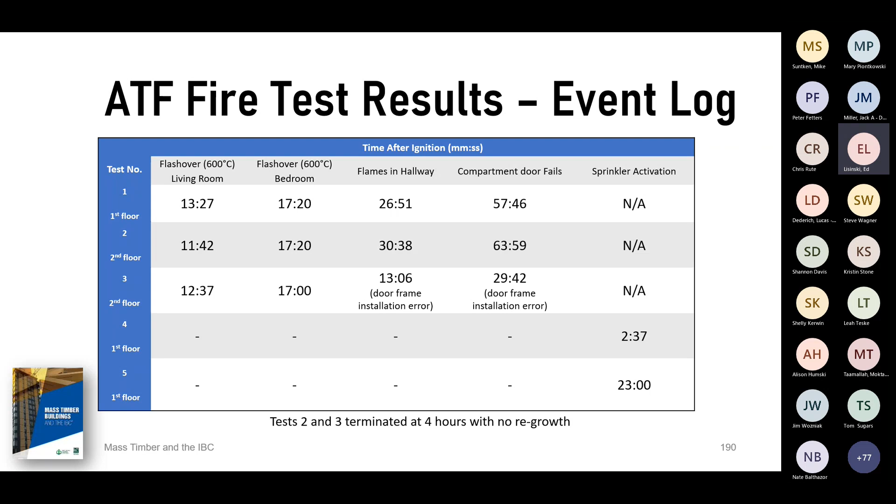Again, all the tests were terminated with no regrowth of the fire. It says test 2 and test 3, but those ones went to 4 hours - they just wanted to let those things run out as long as they could. But all of them were shown with no regrowth. Again, that's just some of the other recap of some of the other stuff. The numbers on here really don't matter.

Here's another one with temperature of the ceiling gas. Same thing, the black line is what they predicted, the blue line is the actual recorded data. Again, what they thought was going to happen is pretty much what happened.

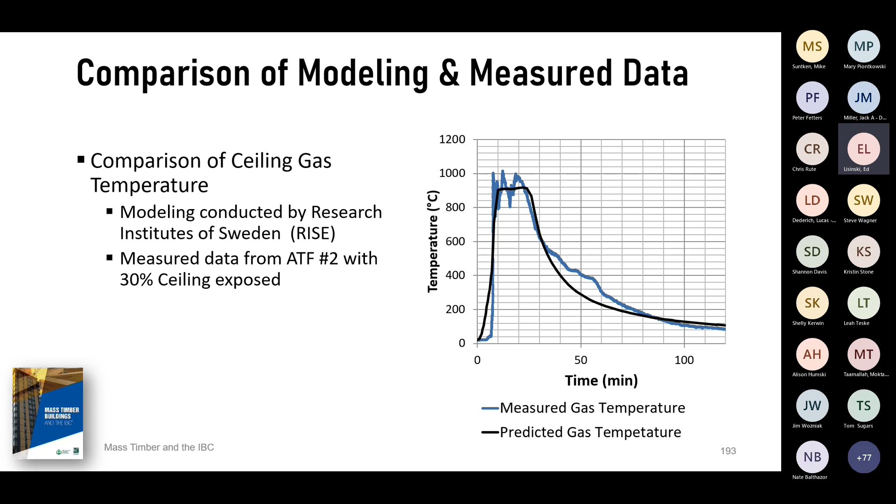Did they know exactly what the rooms were loaded with, or did they take an estimate of a typical load when they predicted the scenarios? Yeah, they would have put in whatever the heat or room load would have been based on the furniture in there.

So each of the new construction types were based off some of those tests. The first test is going to be equivalent to or real similar to 4A. Test 2 and 3 are real similar to 4B, and then 4 and 5 are real similar to 4C.

Again, they went through all of those. All the fire test reports, the videos, all that stuff is on our website, awc.org. You can take a look at that if you're interested.

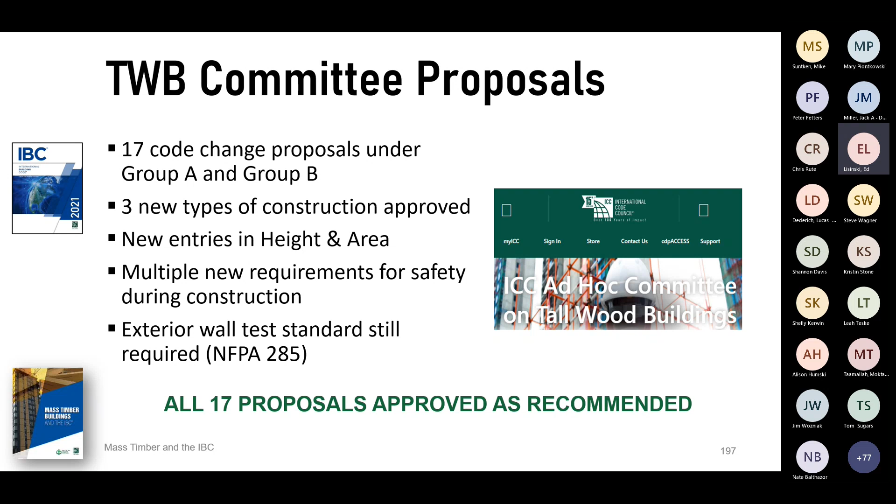Based on that testing, and they did a whole bunch of other testing too, after they had narrowed this down to what they wanted the building to actually do, they ran those tests just to prove they were going to be good with them. They went through 17 different code change proposals covering new heights, new areas, new construction types, safety during construction, exterior wall tests, things like that. All 17 proposals were approved.

If you want to go through, on the ICC's website, if you go to CDP Access, you can still watch all the hearing videos. You can read all the code change proposals and all the background data and everything that was submitted. All that stuff is out on the ICC website. We have links to it on our website as well, if anybody's interested in going out there, watching the videos, seeing the testimony on this stuff.

Are you getting similar results from NFPA's building code standards? Yep, actually NFPA 5000 you can actually do bigger and taller than what's in the IBC. That's more of a fire department generated code, and they actually don't have the equivalency of a 4B here. They basically have the equivalency of a 4A and a 4C, so they pretty much either cover it all up or don't cover up any of it. Those are their two options essentially. But yep, NFPA 5000 has this stuff in there as well.

All right, questions on any of the testing procedures, all that type of stuff, the ad hoc committee? All right.

So what did we come up with then? What were those 17 code changes? Well, first off, they wanted to go through and do some definitions. So they had the definition for mass timber: structural elements of type 4 construction, primarily of solid built-up panelized or engineered wood products that meet the cross-sectional dimensions of type 4 construction.

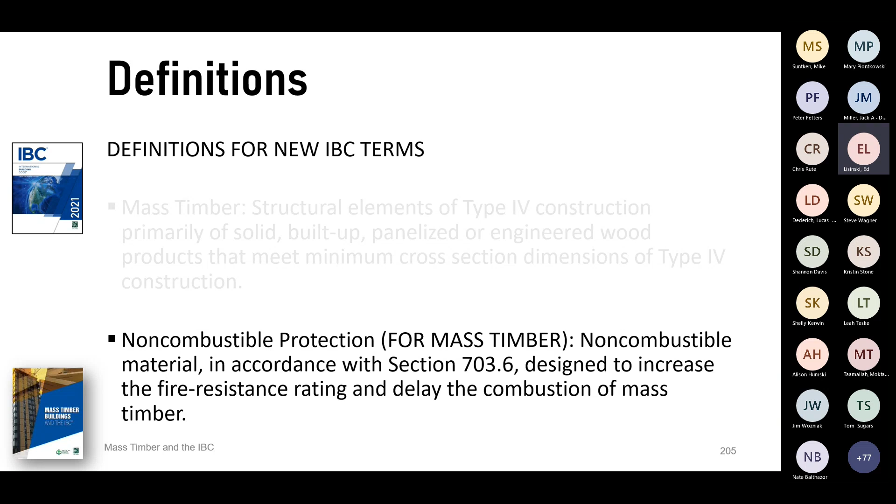So 722.7 is the fire resistance rating of mass timber, and that's where you get into that non-combustible protection. The fire resistance rating of the mass timber elements shall consist of the fire resistance of the unprotected element added to the non-combustible protection. So the CLT itself, or even the glulam beams and glulam columns, there are fire resistant properties incorporated into that. You add whatever you get out of that, plus your non-combustible protection that you're going to put around it.

And so how much non-combustible protection are you going to have? Well, it's typically going to be 2/3 of what's required in non-combustible protection.

So table 722.7.1(1). If you have a 1 hour fire resistance rated construction, you need that wall to be 1 hour rated—at least 40 minutes of it has to come from non-combustible protection. If you need 2 hours, if you have a column and you need a 2 hour rating on that column, 80 minutes of that 2 hours has to come from non-combustible protection.

And then 3 hours or more, again, 120 minutes has to come from non-combustible protection. And that's nice, it's all in multiples of 40. I wonder what the code's going to tell you about that. So we'll get to that in just a second. So the rating in minutes contributed by the non-combustible mass timber elements shall be in accordance with 703.6.

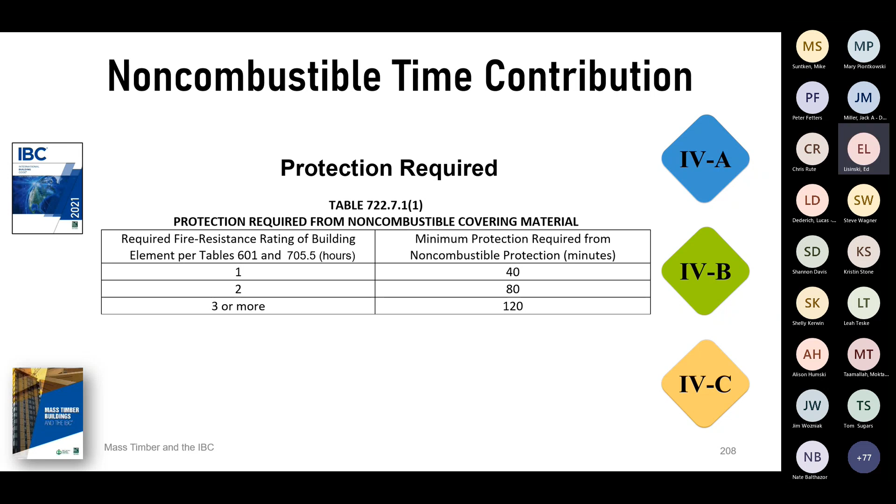So again, if you have a 1 hour wall, you need 40 minutes; 2 hour wall, you need 80 minutes; 3 hour wall or column or beam, whatever element you have, 3 hour or more, 120 minutes. So each of those are multiples of 40. So most of the time, everybody's just going to throw on 1, 2, or 3 layers of 5/8 type X on there.

Does that apply to mass timber elements outside of type 4 construction, or is it limited to that? It's a good question. Yes, that would—anytime you have a mass timber element.

I believe, let me double check that on the break. I'll check through the code and answer that one after our next break. I want to make sure on that, because if you have a mass timber element in a type 5 building and you need it to be 1 hour rated for some reason, I actually think you could leave it exposed, but let me try to double check that one.

All right, so now we know we have that prescriptive method. If you're going to use that method, there are a list of rules on how to use that gypsum as a non-combustible protection. Your screws have to penetrate the mass timber by 1 inch or more.

The screws have to be placed no more than 12 inches on center in each direction from each other. Also, if you have 2 layers on there, the screws from one layer to the next layer have to have 4 inches of separation. How you're gonna check that, I don't know. But if you come in after 1 layer, see where they're at, measure the first one off the wall and make sure they're all 12 inches down. Second layer goes on, now you're coming off—I don't know how you're gonna do it, I will admit that, but it's in the code. It's their responsibility really to make sure that they meet that.

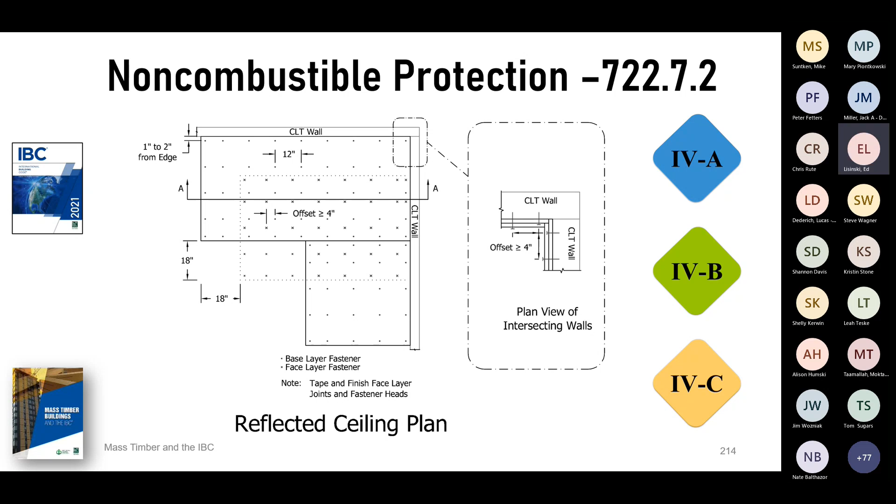That's how you can do those edges then if you do have exposed areas. Exterior surfaces, 12 inches on center in the field, and 6 inches on center on the panel edges for gypsum on the exterior surfaces of exterior walls as well.

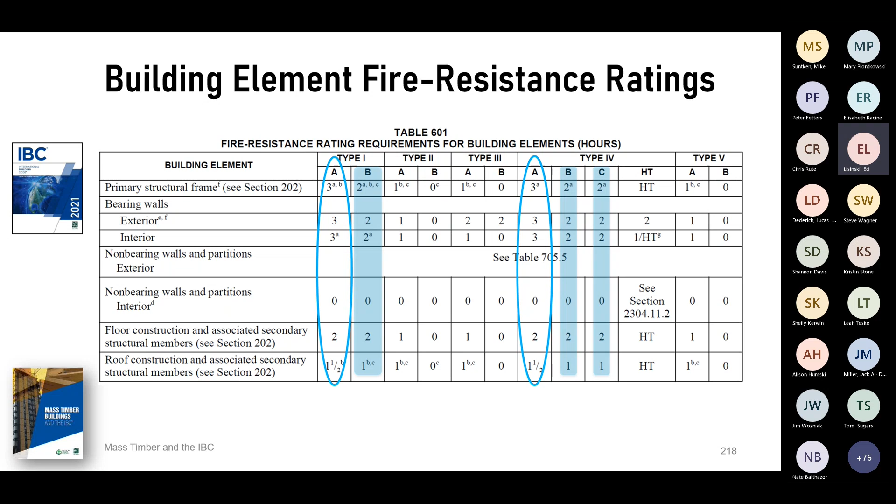For 4B and 4C, same thing, only they copied over the 1B buildings. So you've got 2-hour structural frame, 2-hour interior and exterior bearing walls, 2-hour floors again, and a 1-hour roof. That's what they just cut and paste right over to get a 4B and a 4C. So again, that level of fire protection you have in a 1B building is what you're getting in 4B and 4C.

Because you're on the 2015, you probably know this as table 602. In the 2021 though, it got moved into the exterior wall section, 705.5. So it's now table 705.5. But this is your fire resistance rating based off of fire separation distance.

You can see here from 5 feet to 10 feet, you've got a separate category in there for a 1A building. Again, 1A fire protection is equivalent to the 4A fire protection, so they brought over a 4A. Then from 10 to 30 feet, you've got 1A and 1B at a certain level, and 4A, 4B are brought into that. They didn't bring in 4C - I don't really know why, but everything else 4C was the same as 1B, not for that one.

All right, so in the code though, again, with the 3 new construction types 4A, 4B, 4C - no changes to the height and area and general requirements of the old type 4 buildings. They did rename them as 4HT. There are some things we'll talk about later, that you can't have concealed spaces in a 4HT now, the old type 4s. That's pretty much the only significant change to the old type 4 buildings.

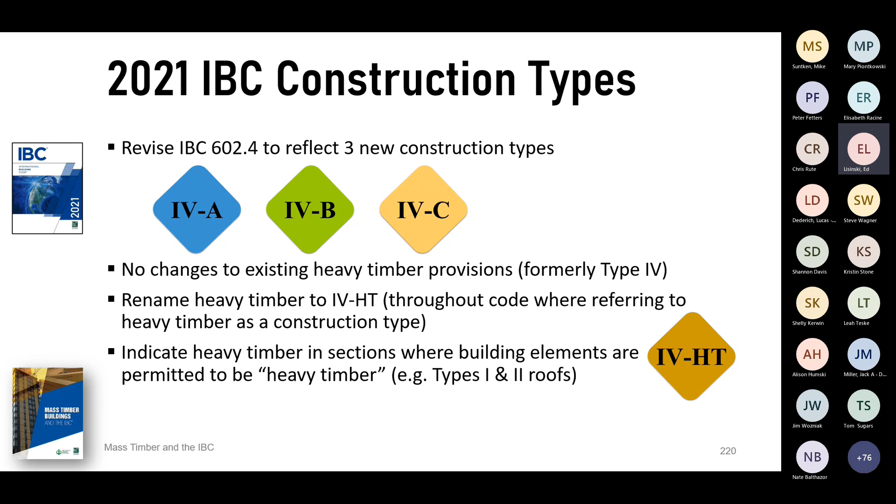All right, so types construction comparison - 4A, 4B, 4C. The 4A is 100% non-combustible protection on all surfaces of the mass timber elements. So when you have these 4A buildings, you're not going to see wood anywhere unless it's like a finished material, but all the mass timber is going to get covered up with 2 layers of 5/8 type X everywhere.

Type 4B is 100% non-combustible protection on all surfaces of mass timber, except for some limited exposure areas. If you remember those fire tests 2 and 3, we left some ceiling areas opened up, we left some wall areas opened up - that's where you get into the 4B. So almost all of it's going to get covered up, but we're going to leave a couple areas exposed of that mass timber wood. And then 4C, 100% exposed mass timber, with the exception of shafts, concealed spaces, and the outside of exterior walls.

On all these, the outside surfaces of exterior walls are always going to get covered up on mass timber elements. That's why a lot of times you're not going to see CLT panels on walls, but you're going to get your typical curtain wall framing on the exterior walls. But if you do have CLT panels on the walls, the exterior side of the exterior wall is going to have at least 1 layer of 5/8 type X on it. And that's for A, B, and C.

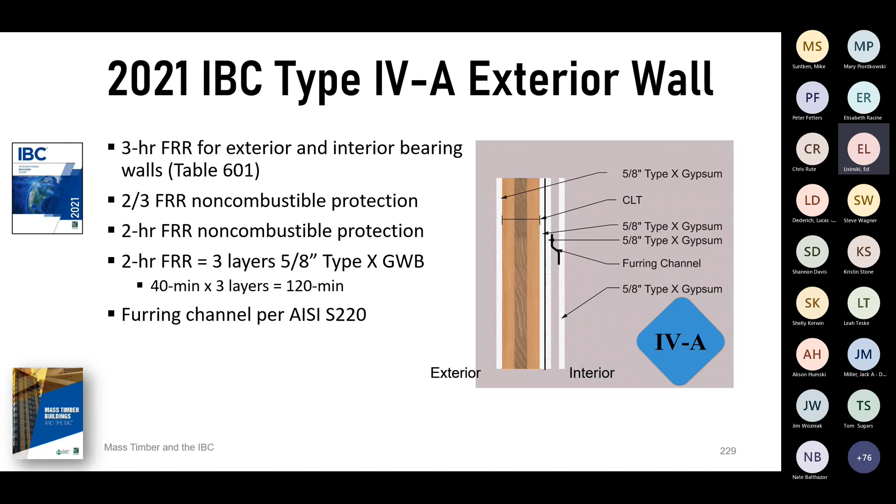One thing to note: the 1 layer of 5/8 type X is required on the exterior side of an exterior wall. But remember, if you are within 10 feet of a property line, or your fire separation distance is less than 10 feet, now you have to worry about fire exposure coming from that other side as well. So you may have to add some additional layers on the outside of that as well. But typically, you're going to have just that one layer on there.

And then that's kind of what that looks like - again, everything's covered up with gypsum.

Floors are required to have a 1-inch non-combustible material on top of the mass timber. That's different from that non-combustible protection we were talking about - this can be any non-combustible material. A lot of times you can get 1-inch gypcrete on top, or you could do 2 layers of 1/2-inch cement board, like a Durarock type product. So it's not specified as much - it's just at least 1 inch of non-combustible topping. And that's going to be in the 4A and the 4B. You don't get that in the 4C.

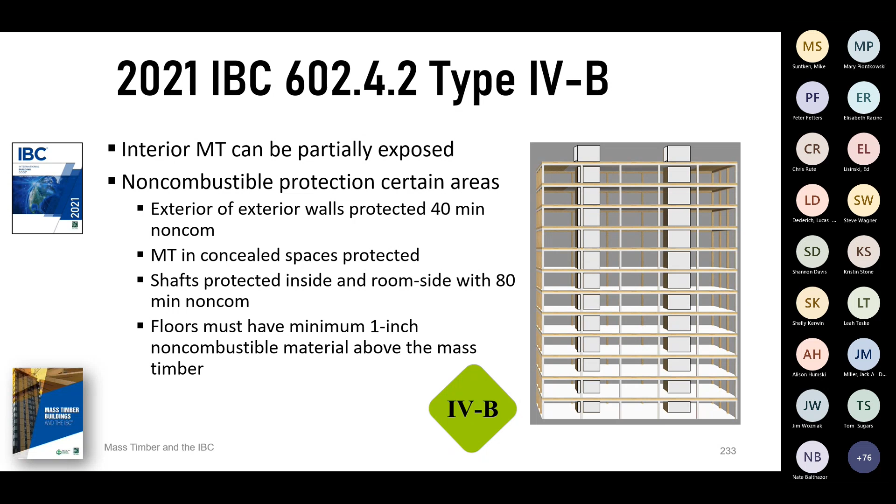Now let's talk about some exposed layers or exposed areas - what does that actually mean for a 4B building? Section 602.4.2.2.2, hopefully you all got that covered.

Unprotected portions of mass timber buildings - this is in the Type 4B section. So this is just for Type 4B. In Type 4A, you're not going to have anything exposed. In 4C, everything can be exposed. But in 4B, where can we expose it? There's actually 4 different scenarios of where you can have exposed

mass timber elements in a 4B construction. So number 1: unprotected portions of mass timber ceilings, including the attached beams, shall be permitted to have an area equal to 20% of the floor area in any dwelling unit or fire area. We'll break that down. So 20% - like Randy pointed out before, the test, yep, they were at 30%. They kind of cranked it down a little bit to actually get it into the code, so they put it down to 20%.

So 20% of the floor area can be exposed in the ceiling. Now that's of the dwelling unit or the fire area, which means, if you take this building - I'm going to assume we're all on one big fire area here for at least this floor, that this isn't really broken up too much - you could, if this was a mass timber building, walk into here and conceivably this whole entire ceiling in here could be exposed because you're at 20% of the fire area. You're not 20% of the room.

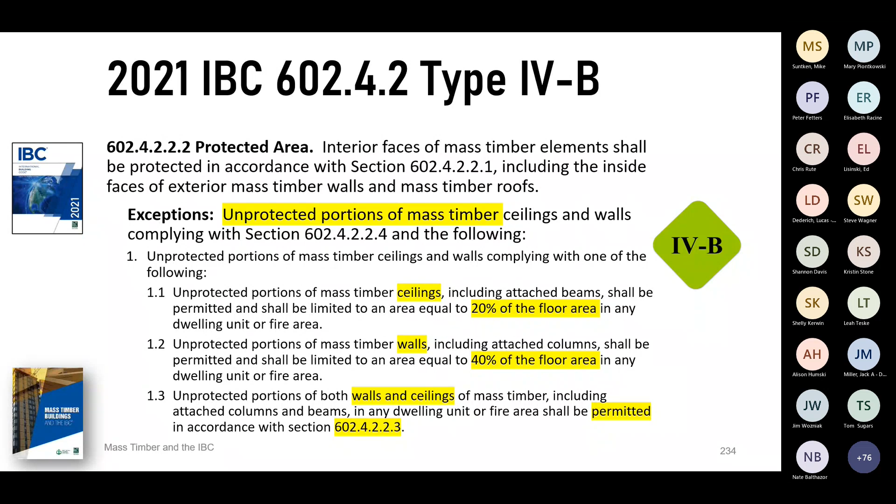I think it's the ceiling area conforming with exception 1.1, so that would be your ceiling area that you're allowed to have by exception 1.1. And then your wall area as permitted by 1.2. So your area conforming to exception 1.1, and then your wall area conforming to exception 1.2.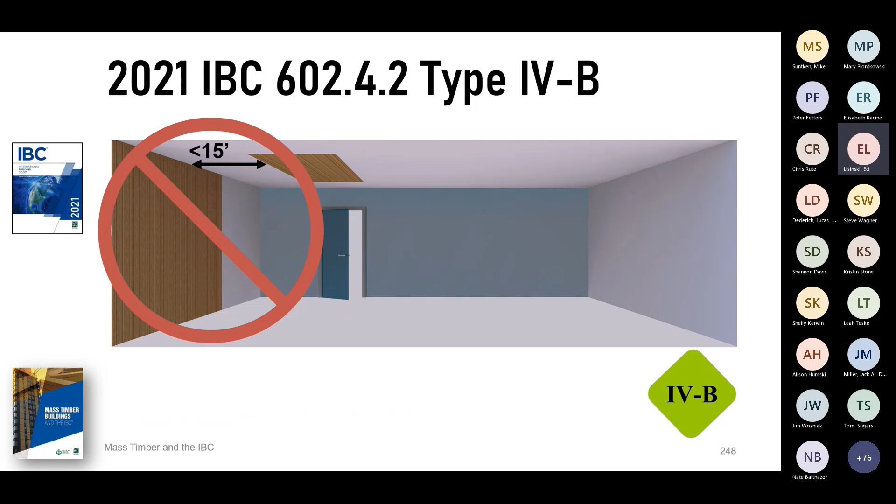So here you can see that ceiling area is now 15 feet away from that exposed wall area. And same thing, even wall area to wall area on that, there you've got 15 feet separating those two wall areas.

Here's just a few other scenarios. So again, here's one where they're taking some in the ceilings. Now we've only got 5.5 feet of exposed ceiling area, and the rest of that's going into the columns, which are part of the wall exposure.

This was in 2020, I believe, 2020 or 2021. Out in Sweden, they did a whole bunch more testing. I mentioned it a couple times at PRG 320, they improved the adhesives, they improved the abilities to withstand fire up quite a bit in these CLT panels.

So they did a lot of testing out there - 5 test scenarios. I won't get into these too much, but they did a whole bunch of testing with exposed areas close to each other. They constructed this all out real similar to the test that we did here, loaded these things up with all the furnishings and everything else. We did a whole bunch of tests on this stuff, measured out - again, they were playing around with having some exposed areas closer to each other.

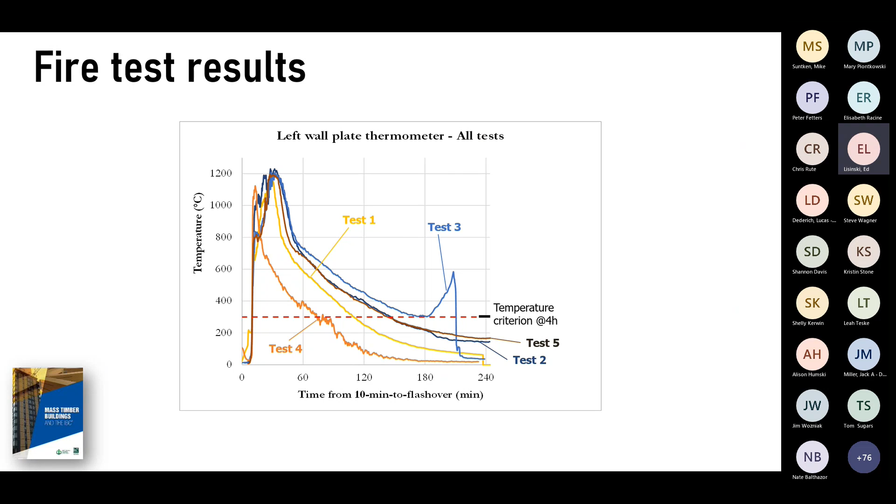And also, I should have pointed out, all these are exposed ceilings in all these areas. You can kind of see that here at the top, that all those ceilings are exposed throughout. When they went through, they did a whole bunch of testing on that.

For the 2024 code, they were able to get G147 passed based off the RISE test, which actually allows for 100% of the ceilings to be exposed now. So in the 2024 code, we're not there yet, obviously - we're not even to the 2021 code yet in Wisconsin. But again, you may see this come up in a variance request or an alternative means and materials request. In the 2024 code, they actually have the testing and the data to prove that you can leave 100% of the ceiling exposed.

Now, again, that's if you put all your eggs into the ceiling basket. If you wanted to have some on the walls, then you still have that ratio in there of what you're permitted on the ceiling versus what you're permitted on the walls.

So you're saying a lot of this has to do with the adhesive changes? Yep. Is that standard across the board now, or is that something you'd need to look at to make sure the adhesive lines up with what they're installing? No, everything that they make now has to comply with PRG 320. So anything coming out is going to meet that.

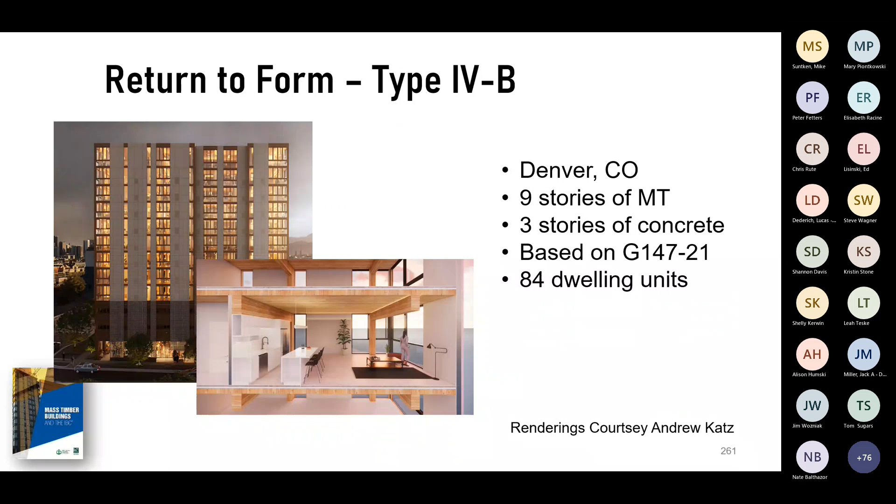So 4C buildings, again, everything's gonna be exposed. I do like this picture just because it does kind of get into a few things just by looking at this - yeah, you're exposing all that wood, but what do you do with electric? What do you do with things like that? So a lot of times with a 4C building, you're looking at all this great wood, but you may have electrical conduit, mechanicals that are gonna be exposed. Some people like that look, some people don't, but that stuff's out there.

4C building, now you can see all the nice brown on there - nice exposed wood throughout. But again, exterior walls still need that 1-layer 5/8 type X. The floors, you don't need that non-combustible topping on there. But then you also do need mass timber covered up in concealed spaces, and then the shafts, inside and outside of shafts. So that's what a sealed exterior wall for a 4C building might look like.

Again, if it is a 2-hour fire resistant rated bearing wall on the exterior, all that 2 hours is going to be coming out of the CLT panel itself. You don't have any of that non-combustible protection to help with it.

I've talked to some builders who have built with this stuff. I said, does it make sense to still throw on a layer or two of gypsum just so that all that non-combustible protection is there to make that CLT smaller? And what I've been told is no - making that CLT bigger is a lot cheaper than paying the labor to bring in drywallers. You've got all the construction waste from cutting up the gypsum, all the extra labor of bringing in crews to do that. Just make that panel bigger - it's a lot cheaper and easier for their construction schedule.

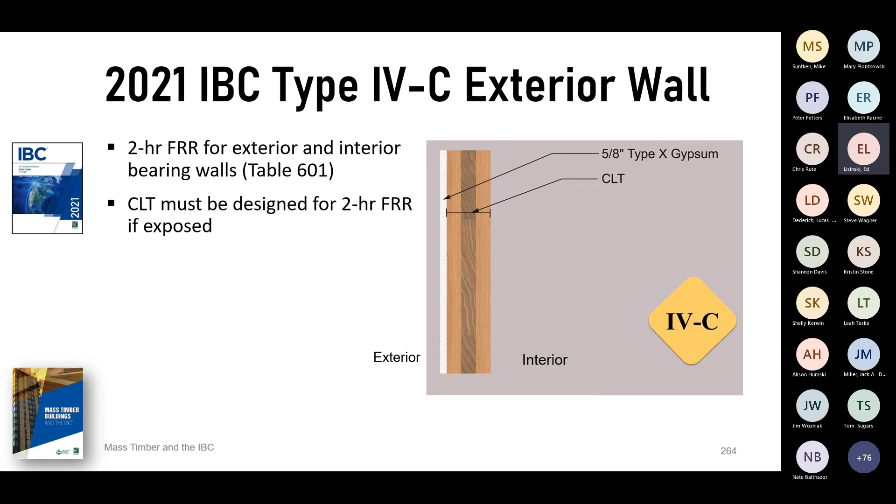All right, exterior wall sections again. Here's a picture of a 4C building, Heartwood Apartments, that's going up out in Seattle.

Fire tests, I'll jump through that stuff. All right, height and areas. I want to make sure we get through this stuff here before lunch.

Height and areas, there's no real science to this stuff, right? Height above grade plane, actually this one there's a little bit, you've got height of ladders and fire department access, some things like that. But I mentioned earlier how that 1A and the 4A are pretty almost equivalent, and 1B, 4B are somewhat equivalent. But 4A or 1A is unlimited everything. They weren't really ready for that quite yet, so. But you do see a lot of similarities between a 1B and a 4B. They're not all exactly the same, but there's some that are matched up.

And then the 4C and the 4HT, same thing, they match those up pretty well. Kind of what they did is they just sort of took a ratio then of the 4C, a lot of times it was doubled-ish, 85 doubled is 170, but they wanted 180 because of that. And so if you kind of add another one to it, now you got 270. Again, it's a lot of just kind of testing the water, seeing what people are comfortable with for this first go around on it. So you can see a lot of similarities on that, but then you do get some things here where they reduce down and just maintain that 65 feet.

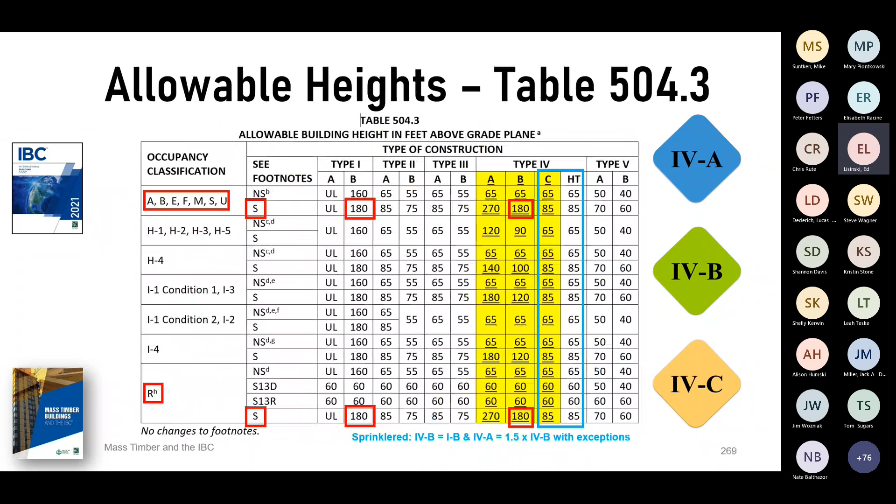Your stories though, once you get that podium, you kind of get to start over, as long as you're separating that out into 2 separate buildings. The Ascent Tower, I think, was 18 stories on top of a 7-story podium. They had a ton of variances for a whole bunch of stuff in there, so you can't really go by what the Ascent Tower did, because they didn't really follow the code all that much — well, they gave them a lot of exceptions to the code.

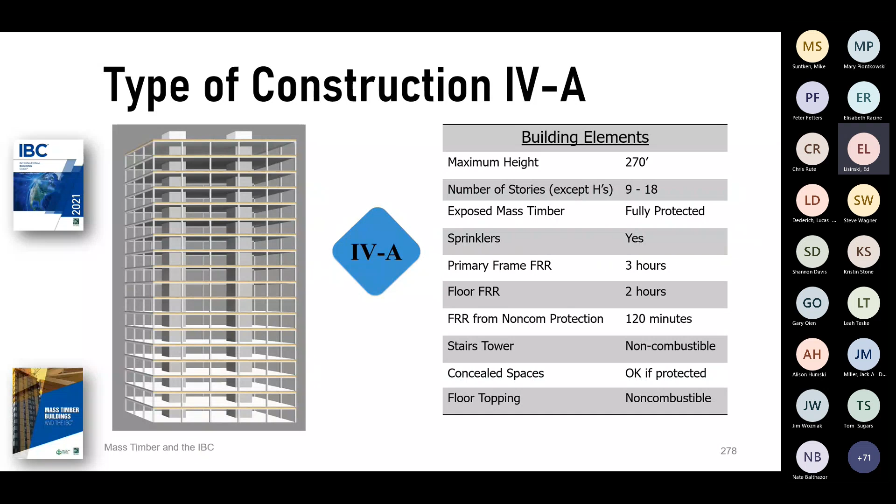So here's sort of a last little recap on some of this stuff. 4A building, maximum height 270 feet, you can go up to 18 stories. Again, fully protected mass timber, sprinklers throughout, 3-hour primary structural frame. Stair towers, non-combustible once you get up over 12 stories. Concealed spaces, you've got to just protect those, and then that non-combustible 1-inch non-combustible floor topping.

4B, 180 feet high, 12 stories max. Most of your mass timber is going to be covered up. Sprinklers throughout, 2-hour primary structural frame. Stair towers are protected mass timber or non-combustible, and still that 1 inch of non-combustible topping. Type 4C, maximum height 85 feet, number of stories 9. Fully exposed mass timber though, and no floor topping on that. That's just a real quick visual comparison between the 4 types.

All right, questions on any of that stuff?

So those three conditions on the right in the previous slide, you could have the stair tower essentially made of CLT panels all the way up to 12 stories, just protecting it. It's like most of these use those for shear though. The wood would have a decent amount of shear, especially if it's 12 inches thick or 8 inches thick. Just the fact that you can make it out of wood is a plus.

And you bring up shear - it's not part of this presentation, but AWC, on our website, we have a whole bunch of recorded presentations. We actually just did one on CLT panels being designed for shear, I want to say maybe late last year, within the last year. If you're interested in learning more, you can go check that out - it's like a 1.5 hour presentation, something like that.

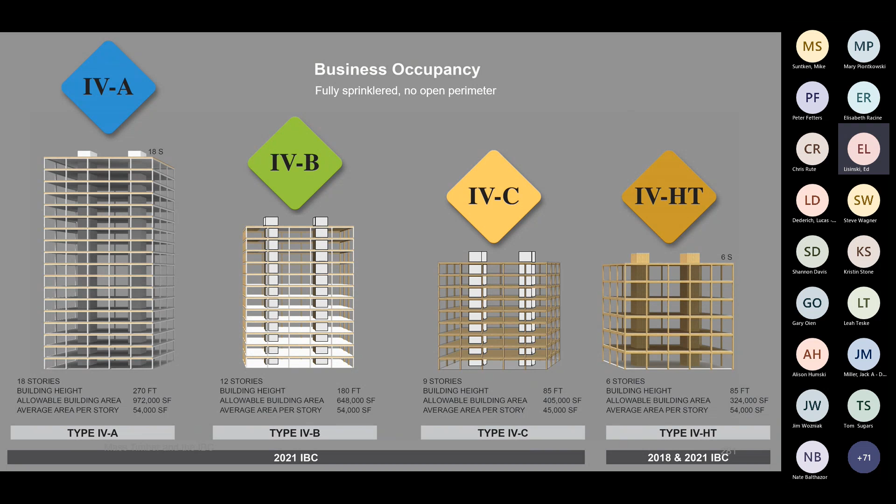Is there very little shrinkage then? Because that would seem like it'd be major. Yep, these things are highly dried down and dried out, and through the engineering process too, it takes out a lot of any other excess moisture that's in there. I want to say the Ascent Tower only dropped like 1 inch or so of shrinkage at 18 stories - it was very, very little.

So on the job site, are the panels really highly protected so they're not getting moisture coming in at that stage, or when they're on the ship from Europe? I think even if they do get moisture during construction, that's going to dry them back out, and once the building dries out, they're going to shrink back down to what they are. But that's not the problem - you know, it's eventually...

I think Tom's more concerned about swelling, like leaving it out over the weekend in the rain. So the construction of the building you showed earlier in that time lapse - there was no covering of the CLT as floors went up one after the other. Correct, yeah. So it could swell during construction, but once you get the building sealed up and start running the HVAC through it, it's going to shrink right back down to where it was.

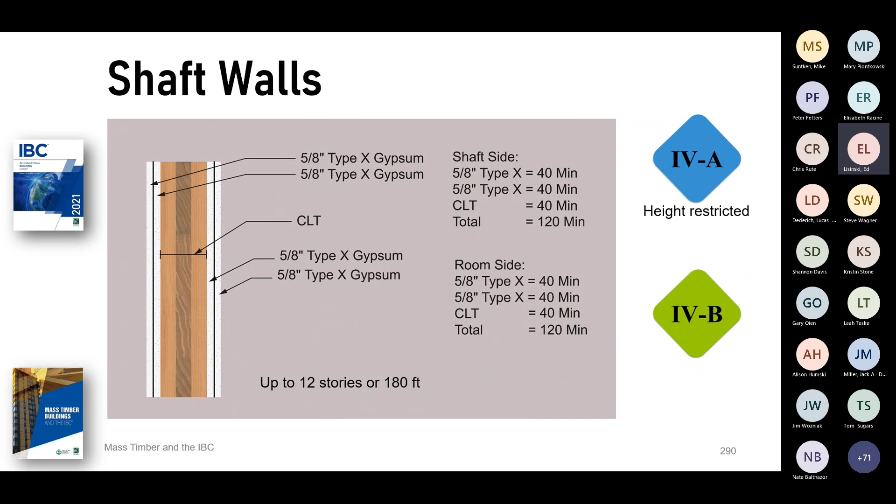Shaft walls, we talked about that quite a bit. I'll skip through this, but again you need that same protection on the inside and outside. For 4A and 4B you've got two layers of 5/8 inch gypsum, which takes up 80 minutes of protection, but that other 40 minutes still has to come out of the CLT itself.

There are some sealant requirements whenever you have mass timber elements butting up against each other. That's in the code. You can also use mass timber elements for fire blocking in the code—that got added in.

Penetrations, once they've been tested for that, I've been told there's no real change to requirements for penetrations. It's the same penetrations you would get on a steel and concrete type building. But again, just make sure they're listed for that.

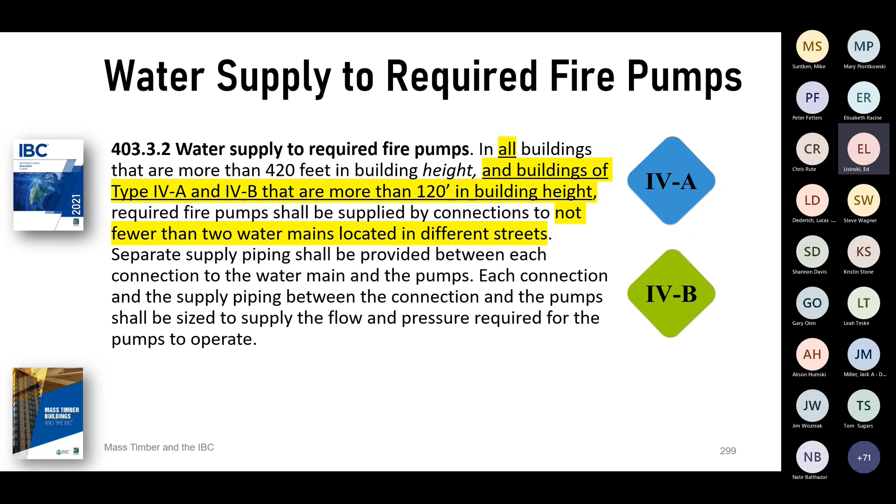Once you get up over 120 feet in building height, for Type 4A and 4B you are required to have a redundant water supply, so two water mains coming in for that sprinkler system off of two different streets. That requirement's already in the code at 420 feet for a high-rise building, but for 4A and 4B, once you get up over 120 feet, that requirement comes in as well.

All right, concealed spaces—I'll run through this real quick. For Type 4A and 4B, you need two layers of 5/8 inch type X covering up any mass timber elements in a concealed space. For Type 4C, you need one layer of 5/8 type X covering up any mass timber in a concealed space. Here's one of the new ones.

4HT is pretty much unchanged other than concealed spaces. You are now permitted to have concealed spaces in the old traditional Type 4, the new 4HT. You've got three options for that. Option 1: if the building is sprinklered throughout with sprinklers in that concealed space, you can do that. Option 2: fill that concealed space completely with non-combustible insulation. Option 3: cover up all the mass timber or combustible surfaces in there with 5/8 type X.

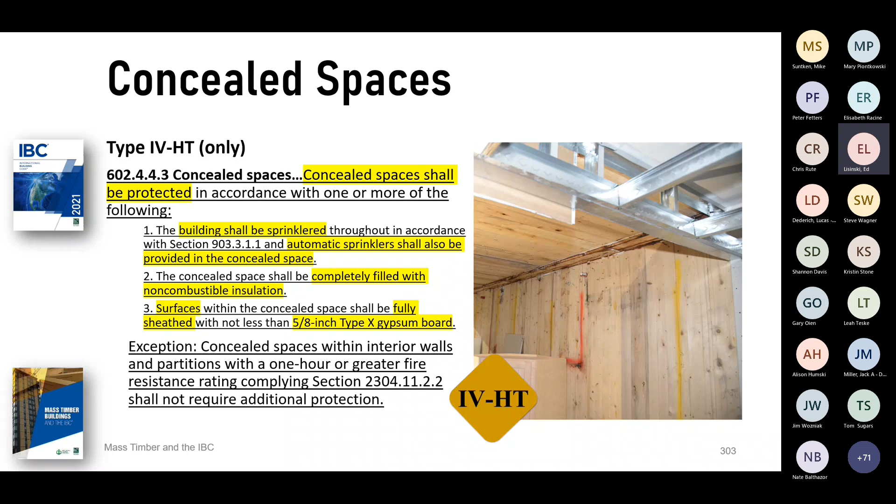So the old traditional Type 4 construction, you can do concealed spaces in there. Again, 4A and 4B need two layers, 4C needs one layer, and 4HT has three options you can choose from. And again, those were all tested.

Let me jump through a few things here. Just want to touch on this real quick—I think it comes up a bit later, but for any structural engineers, or anybody reviewing structural engineering drawings, structural engineers designing this have to look at it both ways. They have to look at the building as they're building it, and then look at the building after a fire.

There are a few other things later on with the size of beams as well that they need to watch out for. So just keep in mind that on bearing walls, the centroid is going to move based on where it is installed today versus where it will be after a fire event.